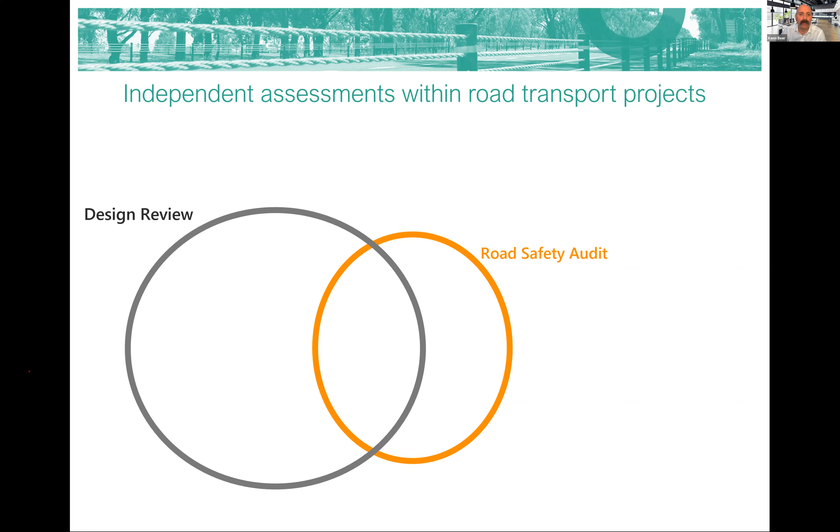You are told very, very clearly as a road safety auditor, you're not doing a standards review. It is beyond that, just looking at anything that could result in death or serious injury for road users, be that meeting standards or not. But there are overlaps you often find in those. So there's a good bit of overlap between those. There's certainly lots in the design review that you never look at or pick up in a road safety audit as well.

A safe system assessment overlaps in a different way. There is a lot of similarity between a road safety audit and a safe system assessment, but they have differences. Certainly there's differences in the way you present a safe system assessment, some of the outputs you'll get, and ideas and thinking. There is, though, certainly quite a bit of overlap there.

Then we have this other thing, generally called safety in design. Sometimes it's called different things in different areas, but it's really looking at: can this infrastructure be built safely? Can it be maintained safely? Can it be decommissioned safely? And can you operate it safely? Again, there's bits of each of these in safety, and safety in design looks at a whole raft of things that are not covered in any of these.

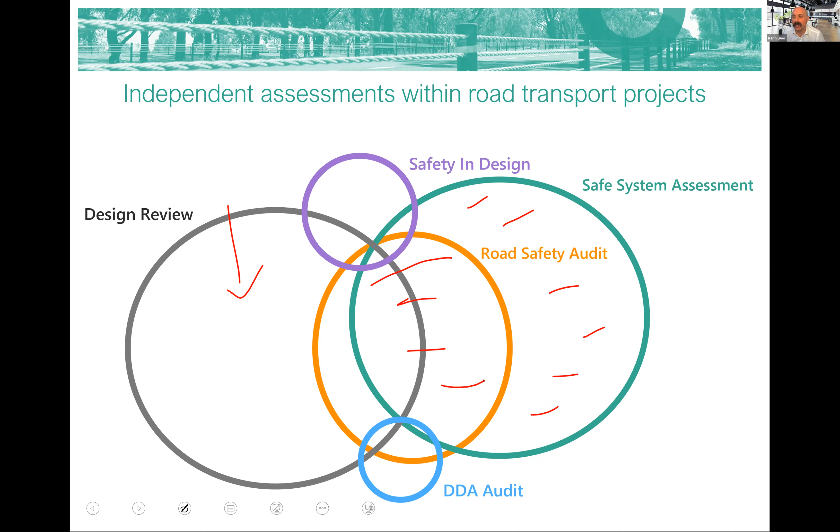Then there's this other one, generally called DDA audits. It stands for the Disability Discrimination Act, which is an act in different areas, and it's called different things in different areas, but the general principle is to ensure that all road users of all abilities are able to use the facility. It also covers buildings, and anything publicly accessed has to have that sort of compliance so that people in wheelchairs, vision impaired people, can use the facilities. And you see there's a bit of overlap in some of these, but there's a lot done outside that. So that's just a general overview to contextualize things for you.

Now, Max, tell me, are you seeing an intersection crash on your screen? I'm just seeing something on my screen that's different. That is, that's up there. Good, okay, we're ticking along beautifully there.

So let's start with intersections and mid-blocks. Let's start with intersections. We know intersections are a point with lots of conflict points, just points that you can crash with another vehicle at. We also often see a spike in run-off road incidents at intersections for a number of factors. First of all, you've got all those conflict points, so there's a lot of people trying to avoid crashes. There's secondary crashes too, so there might be clipping another vehicle and leaving the road.

And there's also quite a number of fixed hazards dotted around intersections. It seems these are spots on our network where we like to put fixed hazards - power poles, signal pedestals, other fixed hazards - they congregate around intersections for some obvious reasons.

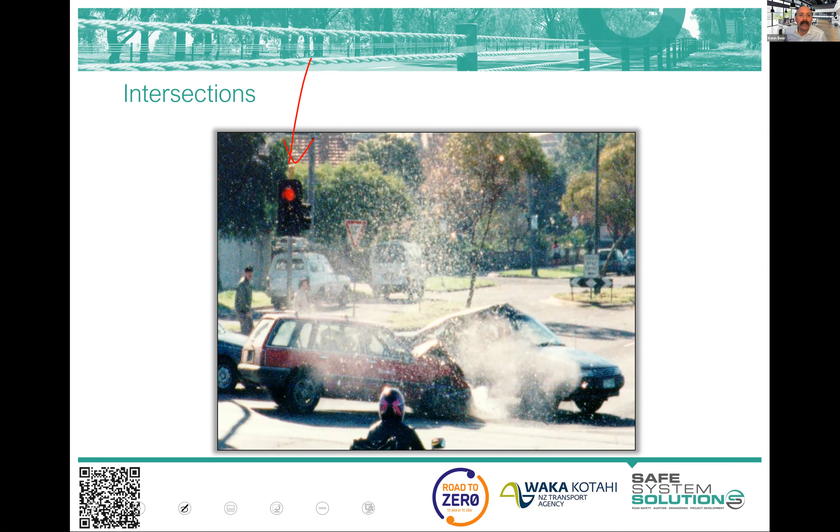So I thought I'd start with this slide from Monash University Accident Research Centre, from a four-part series investigating how to get intersections to align better with safe system principles. A whole lot of stuff came out of that.

There's this interesting set of principles for intersection design to get decent alignment with safe system principles. At the top, they're starting with fewer vehicles and fewer intersections - a slightly different take on things. But remember we were talking about exposure, likelihood, and severity - fewer vehicles and fewer intersections are addressing the exposure to crashes, as we think about it from a safe system assessment perspective.

The fewer conflict points per intersection - this is actually thought of as a likelihood factor in a safe system assessment. Traditionally, depending on who's doing your road safety study, a lot of people would talk about that as exposure. But later down the track, in order to never double count risk, that's been drawn out as a likelihood factor. Unless you've eliminated the conflict points, you still just put it in as a likelihood factor.

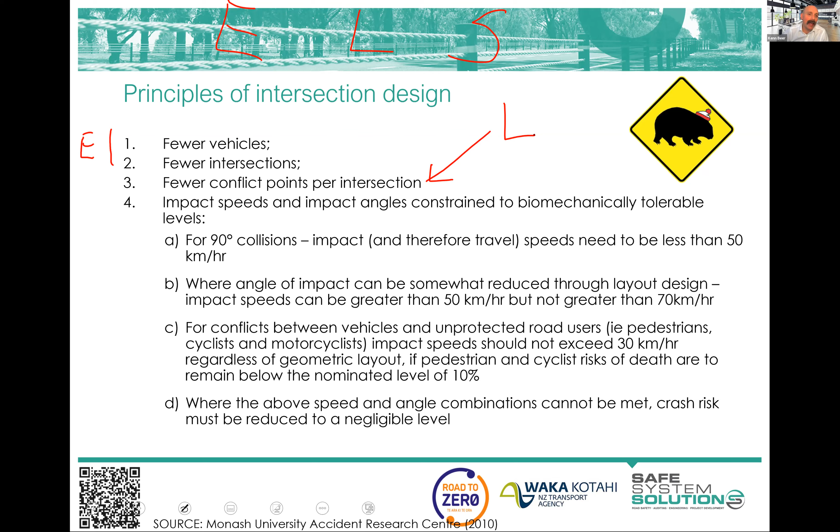And then we've got a whole lot of things here about speeds and angles within biomechanically tolerable levels. So these are back to those charts that we used. We're talking about generally 90-degree crashes, right angle crashes, less than 50 kilometers an hour. We should be aiming at that, where that can occur.

When you can get a bit more angle on that - go back to your year 11 vectors - we're getting a bit of angle, dissipating energy, bouncing off essentially. We can tolerate more speed because more of that energy is getting dissipated into the environment. Also, if it's a bit more head-on, we start to engage those wonderful safety features of the vehicle - the crumple zone, the airbag, the seat belts. And so you get some better outcomes there.

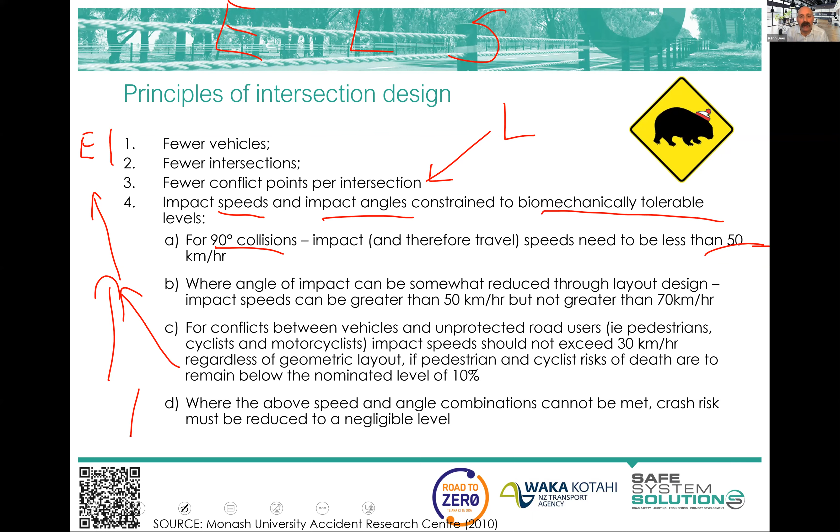There's, as I mentioned last module, a fair bit of work being done continuing to look at these curves, but for the moment we're sticking with that. Of course, vulnerable road users - we're talking about 30 kilometres per hour or below, and in a lot of instances we want quite a bit below that. Where you can't meet these above speeds or angle combinations, risk must be reduced to a negligible level. That's a generic statement, but let's explore that a little further.

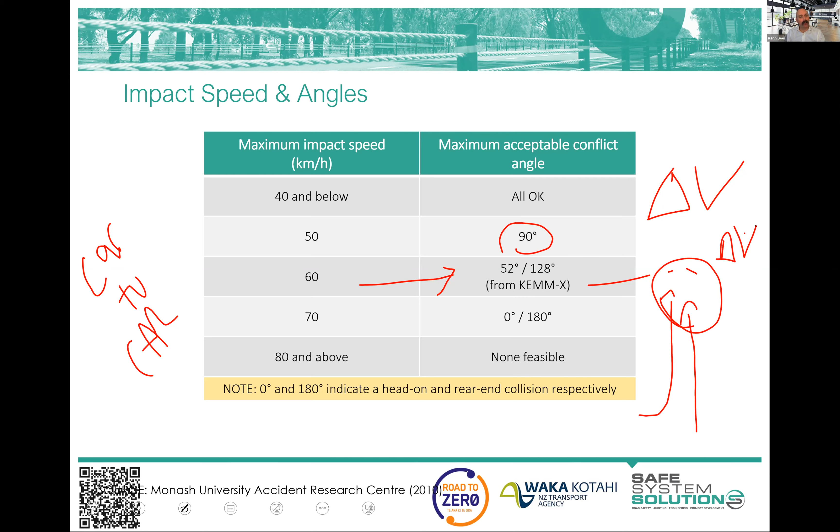The 70 kilometers an hour is the sort of head-on rear end, and 80 kilometers an hour - we can't really see it as feasible for an operating intersection at grade, unless we accelerate vehicles, because we're really talking here about delta V, the change in velocity. If you were able to accelerate a vehicle up and have it merge in, the delta V can be quite low - the change in speed can be quite low. So we can have very high speed crashes at intersections that will not result in death or serious injury, at least from the first crash.

The secondary crash impacts - we'd need to be very careful about how that's all going to happen.

So for new or existing intersections, you can roughly work out your angles and speeds, and start to calibrate that back to what we think is generally tolerable. You're not actually going to need to go to this sort of precision of detail - you can just generally go, oh yeah, that's about a right angle. So we're thinking about 50 kilometers would be good to get speeds down within that sort of level.

Just change the color, and then you might go, well actually, okay, when they get up to the other side, we've got a better angle there. Maybe that's more tolerable around the 60 kilometers an hour for vehicle to vehicle, passenger vehicle to passenger vehicle crashes.

So you can see now that we're well beyond what you'd sort of just look in there and look for, sight distance and warning signs and surface of the road and line marking and things like that. Now we're actually into a bit of biomechanics, kinetic energy analysis.

And for me, over my career, it's been a shift. Certainly early in my career doing working in the regions, doing the crash investigations, the development of road safety programs, the crash reduction studies, those sorts of things, lots of road safety audits and all of that.

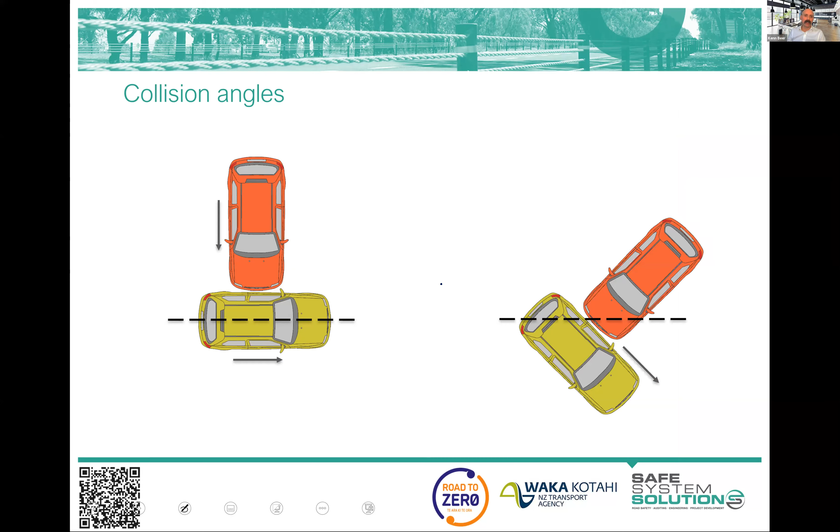There was a study done by the Centre for Automotive Safety Research looking at secondary crashes at intersections, trying to understand where they go. A neat output of their study was, vehicle there, vehicle there. They took a couple of thousand crashes with secondary impacts and reorientated them onto this graph.

And they showed that secondary crashes occur out there. Do we need a big expensive study to tell us that? Probably not.

But it's there anyway. There are some other ones out here, interesting ones which sort of clip off, hit power poles, and go into the roadsides.

But I do think when we look at an intersection, often we are drawn to just focus on that vehicle-to-vehicle crash, or vehicle-to-pedestrian, or vehicle-to-cyclist crash, and we sort of lose sight of the secondary crash impact and the poles and things all around the intersection.

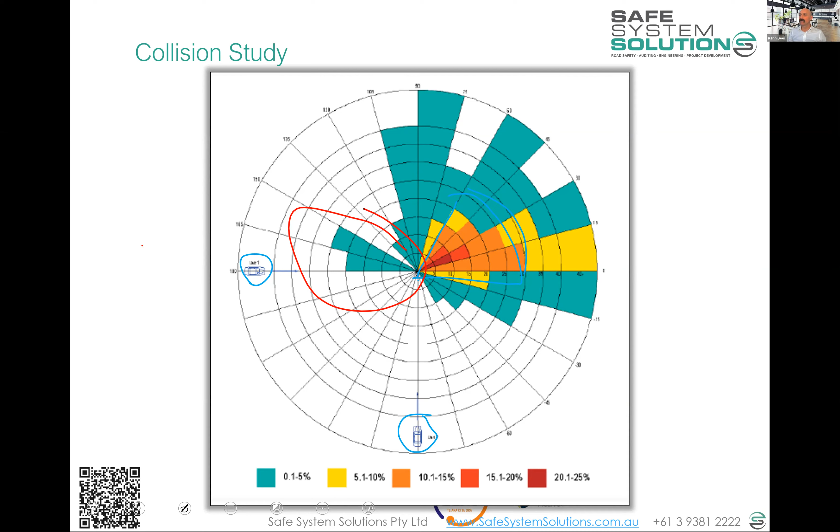So remember those energies, very important, speeds, angles, and thinking about other road users as well.

I'm going to give you an exercise now. I said there'd be one nice and early on. Now, Max, before I start giving this intersection exercise, are there any questions? Does anything need to be covered? So far, so good. Thank you, Ken. You can hop into the exercise.

Okay, here we go. Here is an intersection. The intersection. There is a major arterial road going through this, the sort of growth area of a city.

The speed limit on the arterial is 70 kilometers per hour, the highway, 70 kilometers per hour. The side road here is 50 kilometers per hour, default speed limit. What else can I tell you about it?

21,000 is the traffic volume, the AADT, and it's got about 10%, I think it's 11% commercial vehicles, large vehicles, trucks. This is a bus stop here.

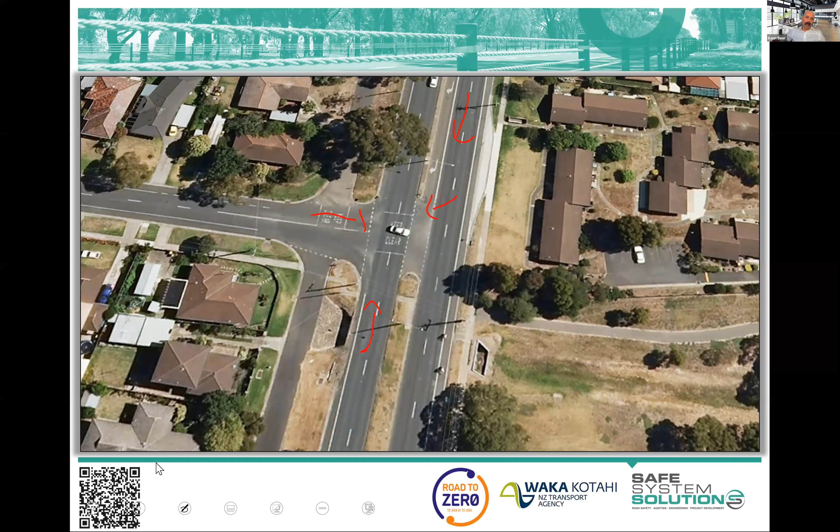So you're going to have a little ponder about it, and you're going to be typing your ideas into the chat. But wait, there's more. Any idea you come up with, I want you to tell us by just putting a letter after the idea. Are you influencing exposure, likelihood, or severity by what you are planning to do? So, you might say, I don't know, I'll think of an example that I'm not going to give away too much.

Maybe something we probably wouldn't do: build massive fences to stop pedestrians entering the area, block everybody off. You would alter the exposure to crashes because pedestrians could not cross, so there were no conflicts with pedestrians. Of course, there's a little bit of ridiculousness to that for many reasons, and they will find their way to cross if you do that kind of stuff, but there you go.

So you just put an E after that. You can come up with multiple ideas, multiple things, and we're going to give you a good 3 or 4 minutes here to do it. You might want to have a stretch as well and fill up your water.

We're only half an hour in, but Max, are you all right with that? Yeah, it sounds good, I just wanted to check in with my cost estimating tool, best practice. How much is a pedestrian overpass going for this specific environment? We're going to go $2.2 million to get that in.

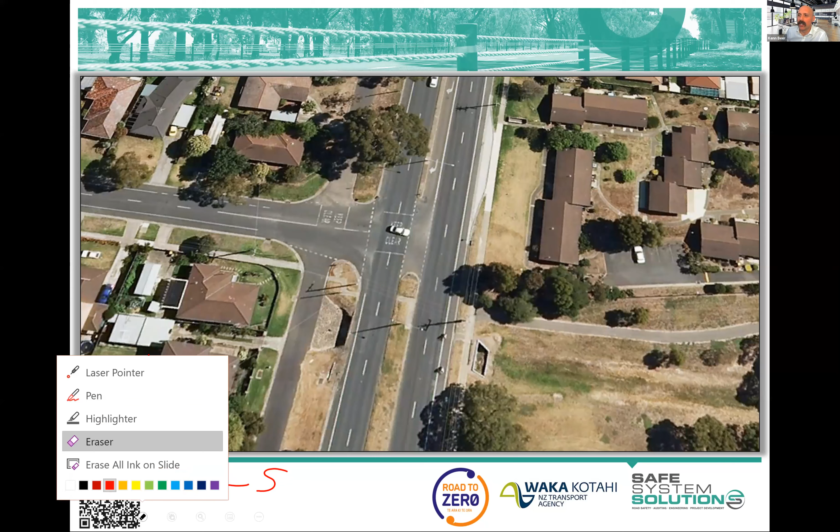So I'm going to jump through and pick a few things out that have come in which are really interesting. The first thing I noticed is there's a lot of people that want to put traffic signals at this intersection, and I dare say that's some people with a very good understanding of how road networks operate. There was a great question about the volume of traffic on the side road, trying to calibrate what is the best control to put here with this unbalanced flow, and people looking at signalization. Most people have correctly identified that signalizing this intersection would influence the likelihood of crashes, and it would reduce the likelihood of crashes.

It's not going to do anything for the severity of crashes or the exposure to crashes, at least the way we think about a safe system assessment. Yes, there might be some crashes where people have seen the orange light, gotten stuck in the dilemma zone, braked late, slowed down and crashed in the intersection at lower severity. But what we're focusing on is the higher end severity incidents that will still occur. In fact, with high speed red light running and nothing to break up the speed, we see very severe crashes. It's not really influencing severity, if anything it might bump it up a little, but generally we call it the same severity of crashes.

The exposure is the same because that's the number of vehicles, pedestrians, cyclists, and motorcyclists going through this intersection. Now if you're thinking it's going to change travel patterns, that if we signalize this more people will come out this way, okay, now you're correctly talking about exposure factors, volumes of vehicles. But in a safe system assessment, I caution you on doing that unless you've got traffic modeling to back it up. It can be tempting to say pedestrians are going to go off the chart or all the vehicles will come through here, so I'll bump up the exposure. We tend to leave it as like-for-like, before and after build, unless we get advice from modeling or some independent source on the latent demand for pedestrian crossings. We don't try to make that judgment in a safe system assessment.

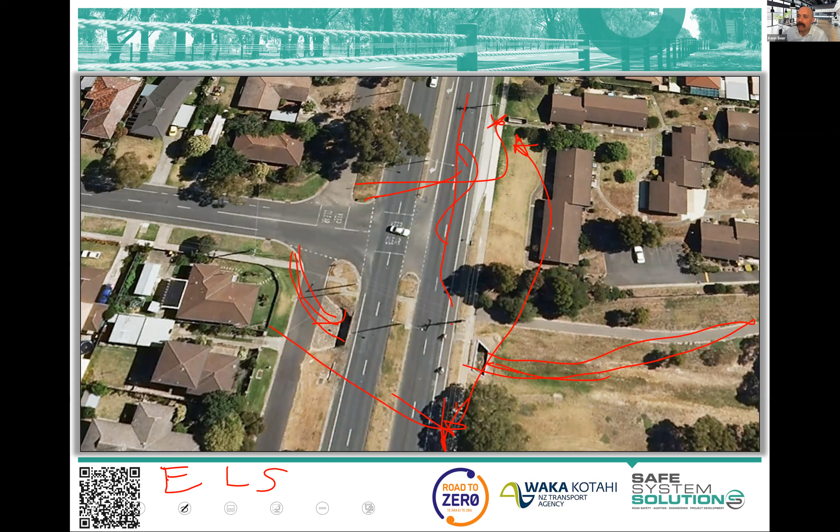There's a few other things that I just wanted to touch on. So we had some people wanting raised platforms, raised crossings. Some people didn't define whether they wanted it there or here or the whole intersection raised, but they're identifying that it will reduce the severity of crashes mainly, but potentially the likelihood as well, depending.

Physical separation between cyclists and vehicles. So there's a really good one. Now, it depends how that's done. That could actually be either likelihood or exposure. It's unlikely to influence severity of crashes, due to the fact that if somehow the crash still occurs, it's really about the speed that it all happens, not whether there was physical separation there to try to lessen the chance it happened, or you can say they're not exposed to it anymore.

But you're always a little bit cautious about allocating that into the exposure bucket, especially if we have, I don't know, some wonderful, maybe take the service road or half the service road for this nice separated facility. It's still going to have to cross this, isn't it? So we've still got conflict there with vehicles and cyclists.

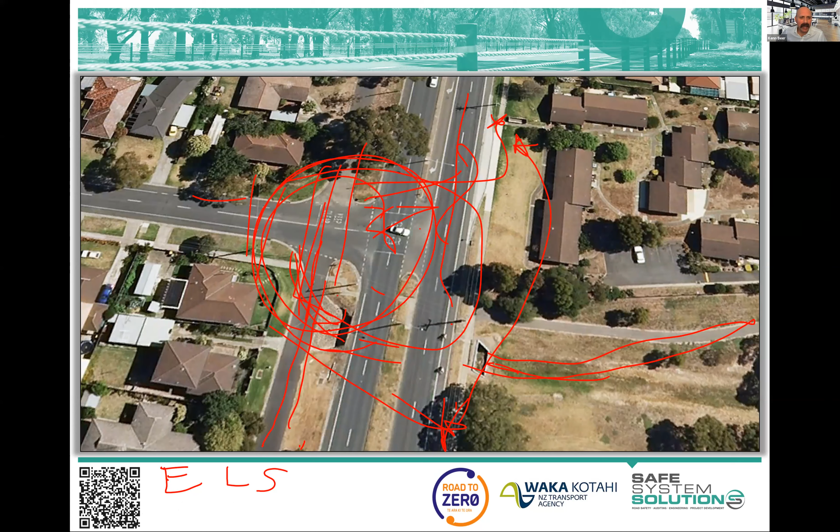Wow, amazing. Really great stuff there. I can't go through everything else. I've had a good look through. We didn't see anybody sort of, did I see it?

Ask about a seagull intersection. So that's where you'd have an acceleration lane in the median, and it kind of looks like a seagull. And it's a fun one to ponder under a safe system assessment, because you actually get this acceleration. You see your delta Vs down, and you get a reduced kinetic energy, but your likelihood goes up a bit, associated with merging from the right, which is a nasty sort of maneuver to try to do.

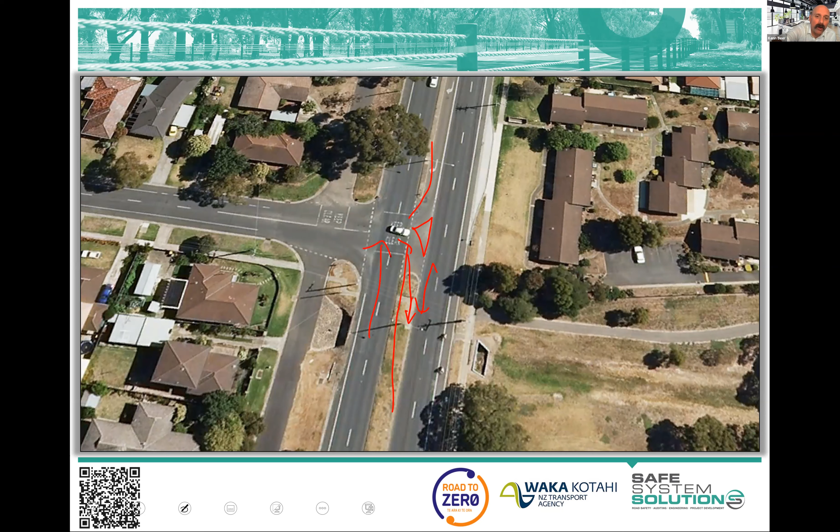And if you have an articulated vehicle like a truck, there's no ability to do that head check. We know old people really struggle with this. So you've got increased likelihood. You're still exposed to the speed and that right angle crash. It's an interesting one. But I just point you at the New Zealand work that was done on seagull intersections.

And there's a seagull intersection risk tool available on the Waka Kotahi website. I use it often. It's lovely. I think that was Shane Turner who came up with that one, but it's freely available to download with a user manual and all. Wonderful stuff.

And Lachlan's also pointing out there, awful for peds in this environment, absolutely. And so you would be thinking about having to add controls to it if you were going down that track. I'm not a fan of seagulls, and I don't think it would come out that well in this location due to volumes and different things. But I just thought I'd mention that exciting tool that wonderful New Zealanders have produced.

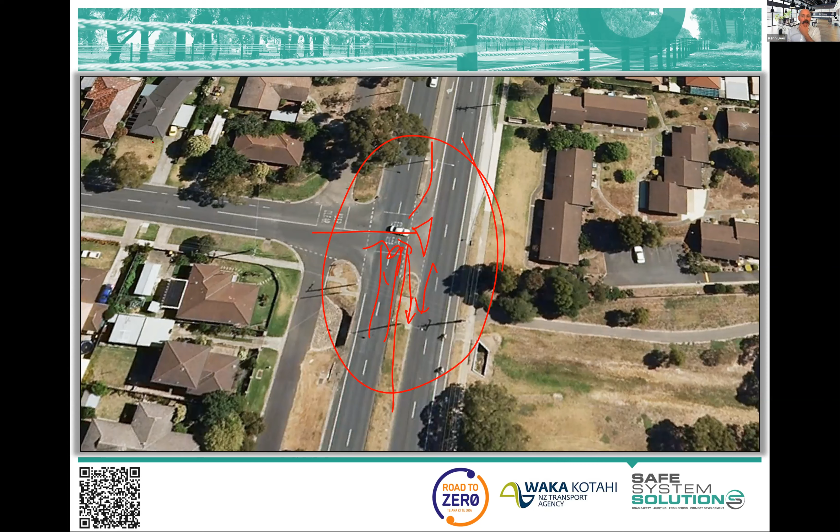All right, I'm going to talk about a few of those things that you've come up with. And Max will tick away at a few things behind the scenes here. So we talked about signalizing, and I mentioned that's going to influence the likelihood. It will reduce the likelihood of crashes. We know that. And we know it's going to be somewhere in that 15% to 45% range, probably, depending on exactly which study you look at.

Lots of factors influencing that. But it's going to address that likelihood. And so really we're not achieving our safe system aspirations if we just do that. And we know that there's that high kinetic energy, potential death and serious injury just sitting there if somebody makes the mistake to run through the red light.

And the reality is, and we wish it didn't happen, there are just a lot of people who run red lights, either because they're not concentrating, they've worked a double shift, they're half asleep, a little bit intoxicated, maybe they're intentionally running it. The mechanisms for why they run it are huge. The end result is high energy crashes and death and serious injury.

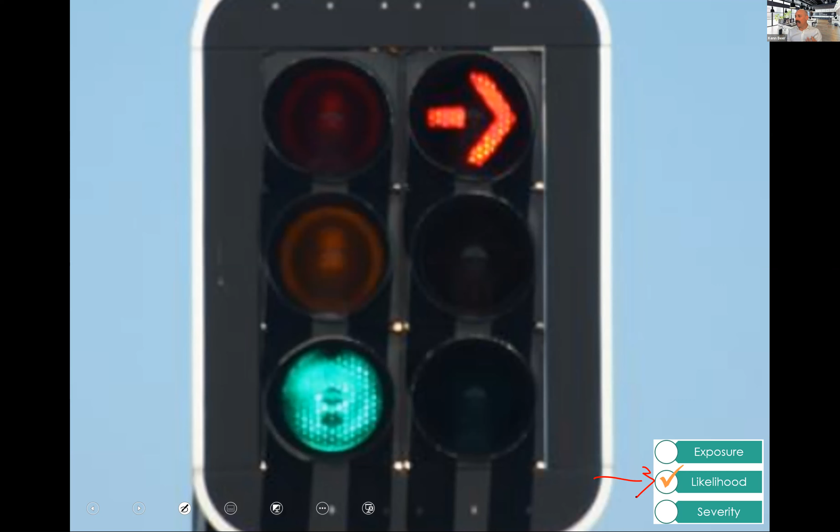In fact, I just mapped, I could have mapped anywhere. I could have mapped the outskirts of Auckland, Hamilton, Wellington, where you've got arterial roads and speeds are up. And this one was actually the outskirts of Melbourne, growth areas and the like, where you've got speeds up and you've got signalized intersections.

Each of these hotspots is death and serious injury. These are actual people killed and seriously injured. These are all large signalized intersections. So we sometimes think of signalizing as your ultimate form of control, don't we? Until you can obviously afford to do flyovers and grade separations and the like. But the thing is that it's probably not, in a death and serious injury sense.

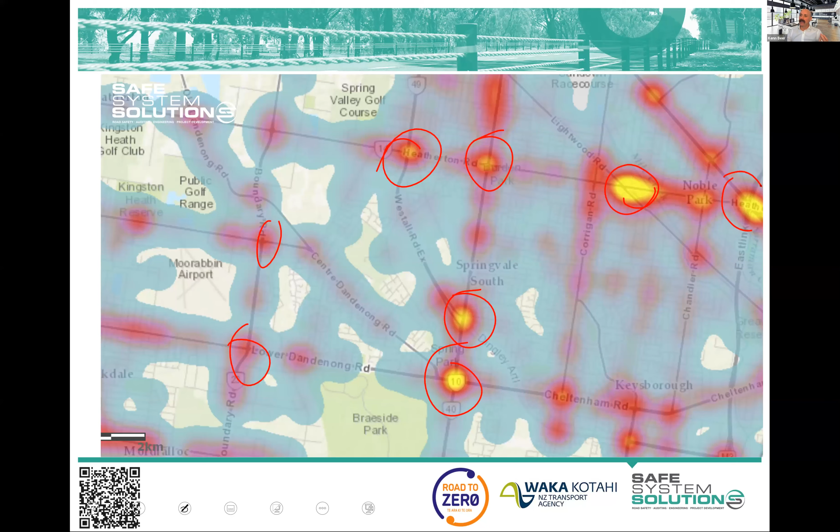Professor Jeremy Woolley made this provocative statement during a national inquiry: traffic signals are the biggest failure of traffic engineers. Pretty provocative statement, I chuckled. He means it squarely from the death and serious injury perspective - we've provided really good red lights, mast arms, LEDs, and people have got to follow the road rules, stop at red lights. Roundabouts, on the other hand, are really wonderful from that severity perspective.

This is road safety engineering 101, but it's always a good reminder, isn't it? Roundabouts slow people down, they're more alert, the angles of crashes are better, there's less conflict points. So many wins with the roundabout.

Now I'm talking about passenger vehicles, and I'm going to spend a good chunk of time on pedestrians and cyclists at roundabouts in the next module. But passenger vehicle to passenger vehicle in these sorts of environments we're seeing here, it's far superior in terms of death and serious injury outcomes due to those factors.

But they have to be big - 7 million, wouldn't surprise me costing that, in the environment you were looking it could cost more. The size, the land take - you've got to get the big vehicle going around it. This is obviously not the same road environment. You would have bought a lot of houses if you had done that. Big swept path of vehicles, and they're very expensive.

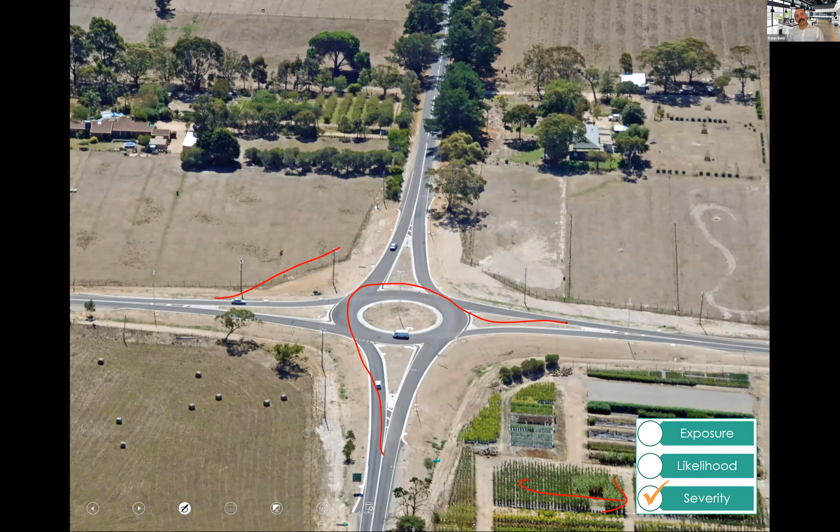One of the big reasons is that anybody approaching this does not believe they're going to have priority. That mindset of priority - and again, it's so subconscious - means that speeds are high, concentration is down, being alert to the road environment is down. But as soon as you break it up with this sort of stuff, people come back to reality, they look around, they slow down, they're at least aware and check.

There's some amazing things - this is sort of the UK equivalent of the American four-way stop, where you don't give anybody priority, everybody slows down, and then there's a bit of who goes first, but hey, it's all happening at low speed. That's wonderful.

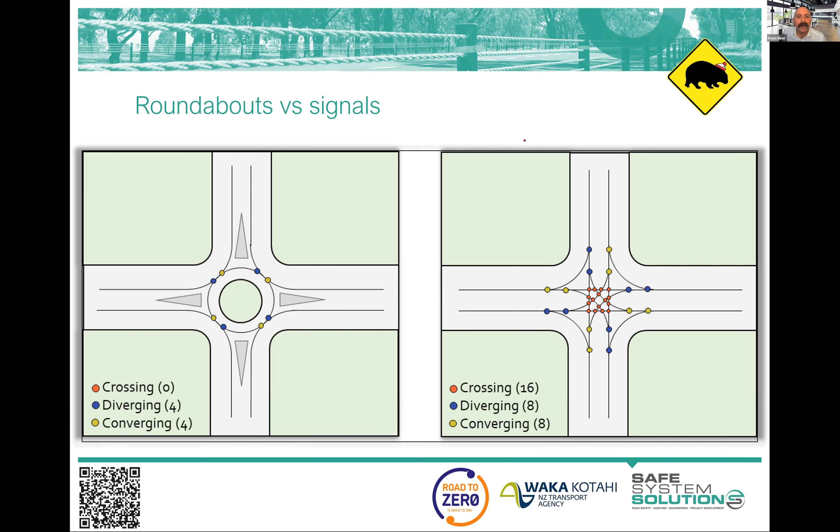Less conflict points, angle of crash is better. The angle of crash is better, right?

And this is the one I talked about - people are driving along in all sorts of states of consciousness. They're half asleep, they've had a fight with their partner, or they've been at their brother's wedding, didn't sleep, partied all the next day, got in the car and drove home. We do not condone this - we are doing lots of things to try to discourage it. But I think from an infrastructure management perspective, we need to start getting our heads around the fact that we do not have alert and compliant drivers all the time.

So what can we do to stimulate interaction with the road environment at critical conflict points, like an intersection?

The big roundabout just wakes them up, back to reality. A big roundabout, infrastructure in the middle of the road, or some way the road tells you to wake up a bit - you have to navigate something, do something. You're back, looking around for a bit, then maybe they go back to sleep a bit. We don't want them driving in that state, but we're trying to address these areas of spiked risk.

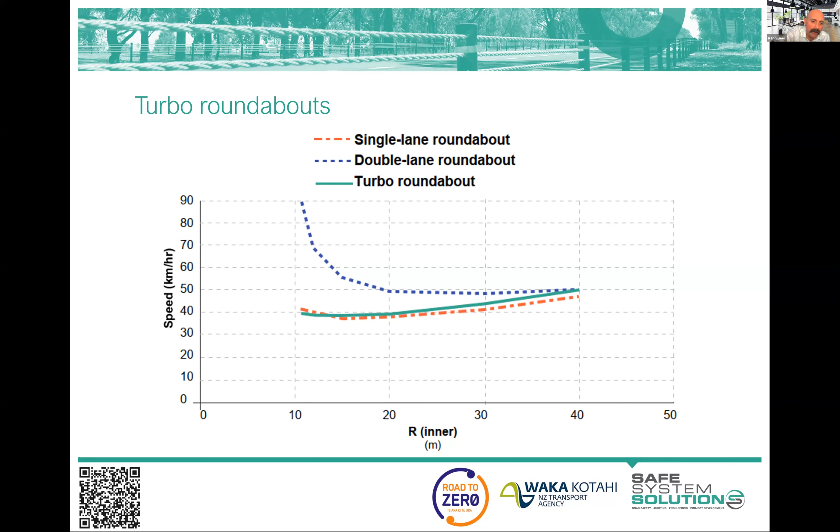Just on roundabouts for a bit of fun - not all roundabouts operate the same, as many of you know. We've got single lane, double lane, triple lane roundabouts sometimes, and turbo roundabouts. Turbo roundabouts operate pretty much the same as a single lane roundabout, but they're a double lane roundabout. I'll show you what they are for those who don't know.

You've got a raised separator on the approach, and a raised separator through your roundabout. So if you want to do a right turn, you get into that right lane, go in, go around, and out you go. You want to do a left turn, you obviously get in the left lane. There's another turbo, and I love this.

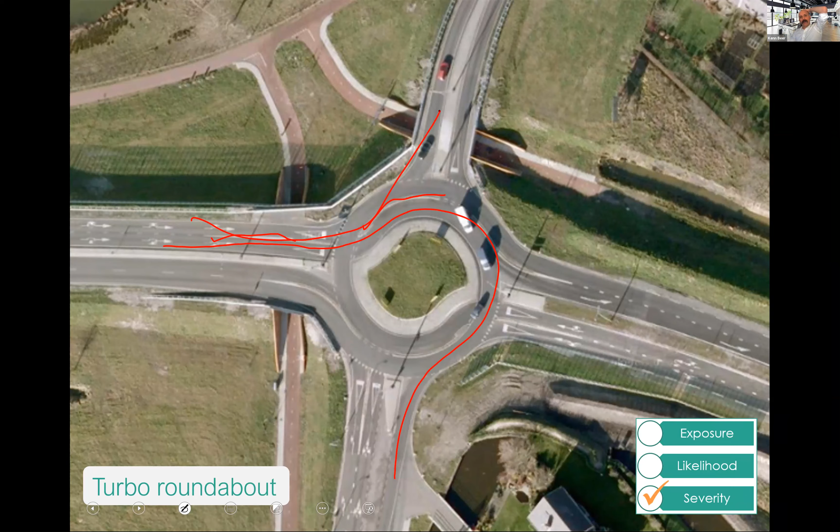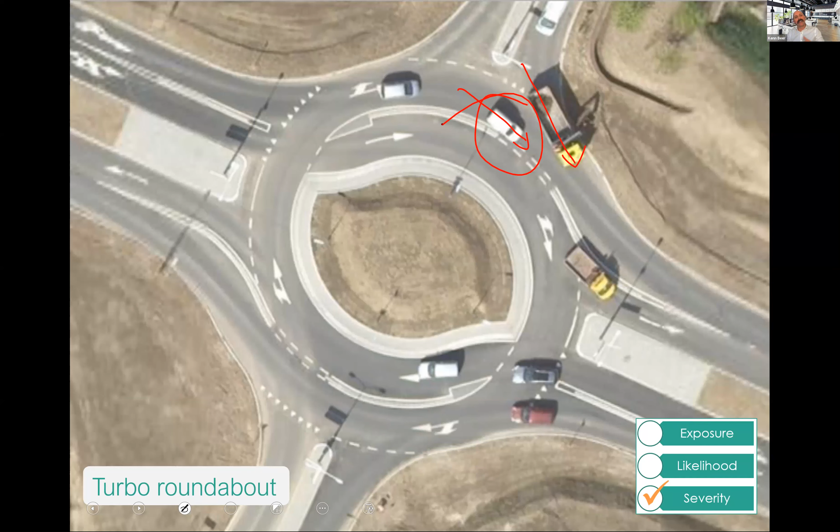I love this aerial image just because we've got a truck that's come out, made a mistake, probably pulled out in front of the white van there. Look at the angle on that. And we know that vehicle is going slow because it's had to navigate around that curve there.

In Australia and New Zealand, with the volumes you're talking about here, we would probably have a signalized intersection. It may have got to the point where we grade separated it, but it's probably going to be a large signalized intersection at those volumes. The Dutch engineer looked at me and said, 'with speed reduction, yes.' I said, no, it'd just be 3 lanes each road, signals. He said, 'with speed, you manage speed.' I said, no, it'd be 70 or 80 kilometres an hour. He said, 'what about all the death and serious injury?' He just couldn't comprehend this.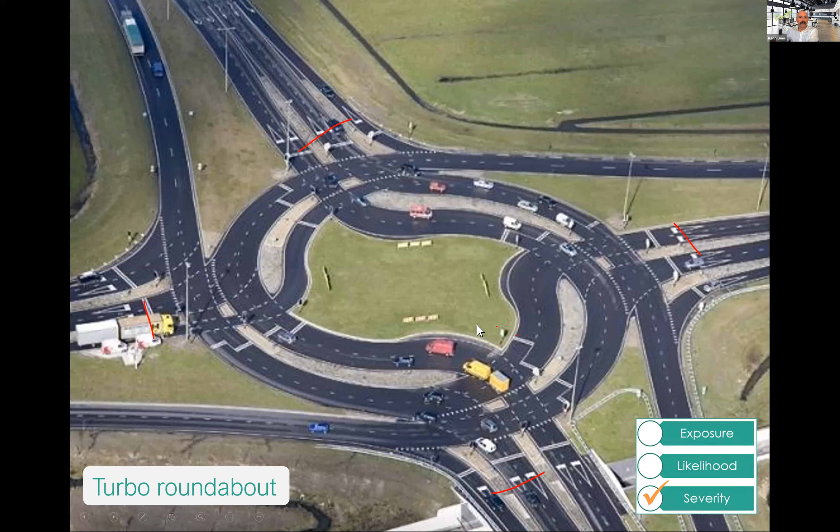Basically the program was to rip out roundabouts and replace with traffic signals. Sorry, I'll come back to this crazy design in a second - not crazy, but I want to see if I can find a memo we used. So they were expecting us to review: is the phasing right, the line marking right, are they using LEDs, that sort of stuff. That's what they were expecting us to come back with.

The Road Safety Department's analysed this project as increasing crashes as follows: project life 20 years, number of deaths attributed to this project 2.3 - I'll put some real people there - number of serious injuries attributed to this project 12.6. Statement of acceptance: the above road trauma is accepted by, and then I send it for the regional manager to sign off.

Yes, we were intentionally being provocative here, but the reality was that you kind of go, we know that is going to cause death and serious injury. It's just that somebody has decided that getting a little bit more capacity through that intersection is more important than the death and serious injury of the community. So we need to boil it down to some in-your-face type thinking.

Anyway, just one you might have found interesting there. Back to the slides. I was just about to show one that I like. Again, it's slightly for fun, but there's a lot more thinking to this, right?

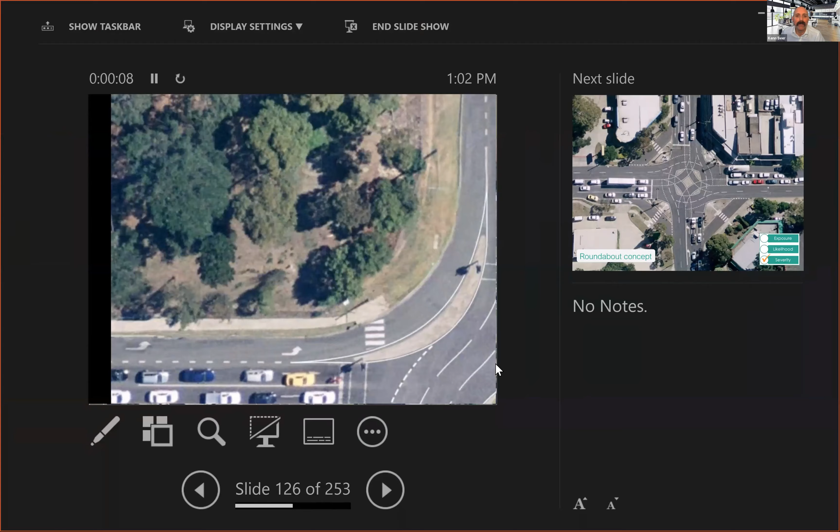Traffic signals tend to operate traffic better, because you can manage traffic, you can get more through and the like. And so that's often the reason why they're ripping those roundabouts out and replacing with traffic signals. But can we still retain some of the advantages of the roundabout, but get the capacity through it with something like this? There's the cut-through roundabout.

Now, this is an artistic impression. It hasn't been built, much to my disappointment. I genuinely think if you're at ground level, it wouldn't be as crazy looking as it is. But anyway, the idea is that a vehicle approaching this would see the infrastructure, slow down, wake up. We'd have improved angles then of different crash types in a lot of circumstances. You get lots of capacity through, and it's going to have generally pretty good safe system alignment. I like this kind of thinking from the principles perspective. There's a lot to work through in operationalizing something like this, obviously, but just the principles I like people thinking through. And there's lots of little mock-ups of this sort of stuff, trying to get some of that benefit.

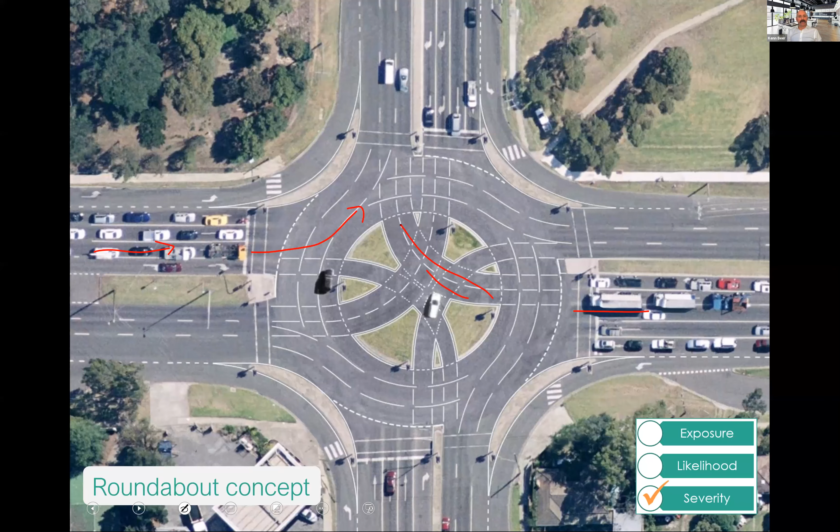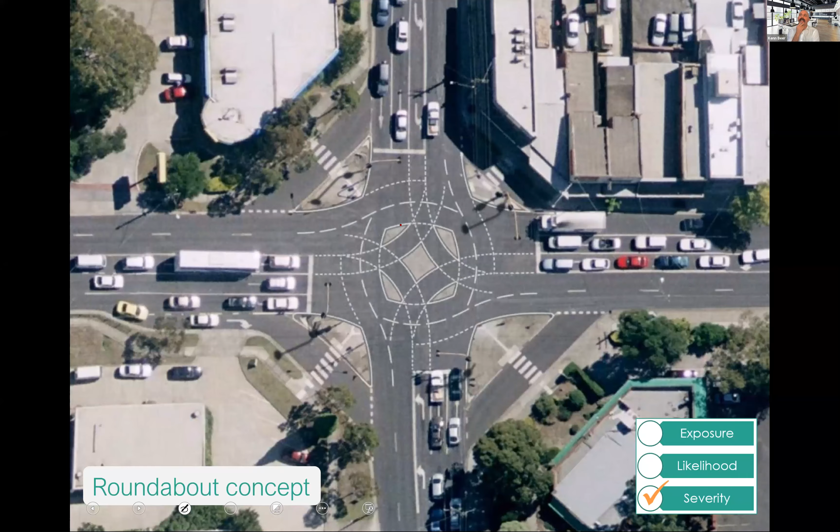Now, a few of you put in there, why don't we do some raised platforms, raised intersection, or the like. Now, certainly when I started my career, if I'd said, why don't we do vertical deflection, something raised on that arterial road with buses and trucks and 21,000 vehicles a day, I would have been told to sit in the corner and think about what I just said. It's craziness. That's the highway, that's the arterial road, you don't do that. Vertical deflections are for your local streets and the like.

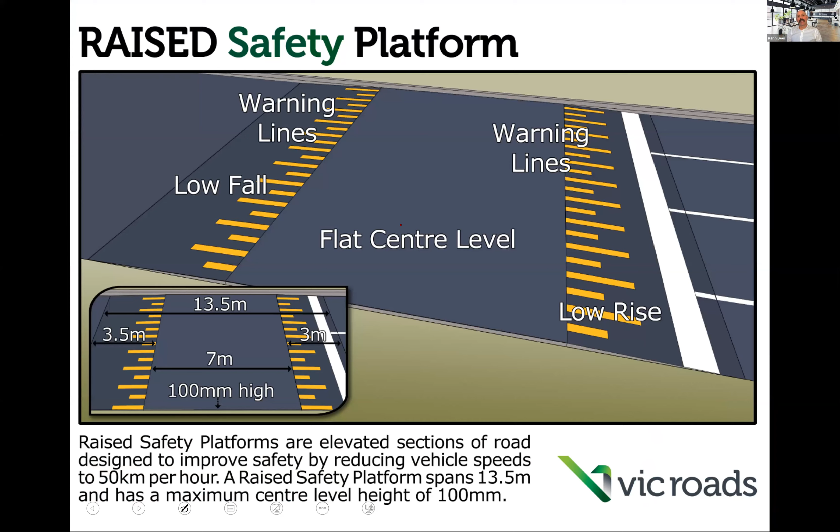But we've sort of altered and shifted that, and we're much further advanced in our thinking these days. And we can understand that it's not necessarily a local speed hump type thing we're creating. It's a platform, it can be shallower, and we can target it to whatever speed we want. And that's what the region came up with for that site that you were looking at. Now, they sort of pondered it, and their budgets, and the traffic flow, the unbalanced flow, and a few different things.

And they decided signals were appropriate, as a lot of you did. But they weren't willing to say, well, maybe if we build these signals, they'll operate differently to all those other ones that there's death and serious injury. Maybe people will take more notice of this red light. No, they're realistic. They said, we're building it, we're going to leave a residual of death and serious injury by doing this. We're going to certainly improve road safety, but is there something we could do to try to help it?

And they said, look, can we slow the bullet vehicles down a bit? These are the bullet vehicles, right? These are the target vehicles, the ones coming out, the ones coming in, right? They don't need to be slowed down because they're not doing the damage, they don't have the speed to do the damage in this scenario. We just slow the bullet vehicles down and try to slow them down to a speed. They went with 50 kilometres per hour as their aim to slow vehicles through the conflict point here, due to the right angle crash possibility and the safe system threshold speeds.

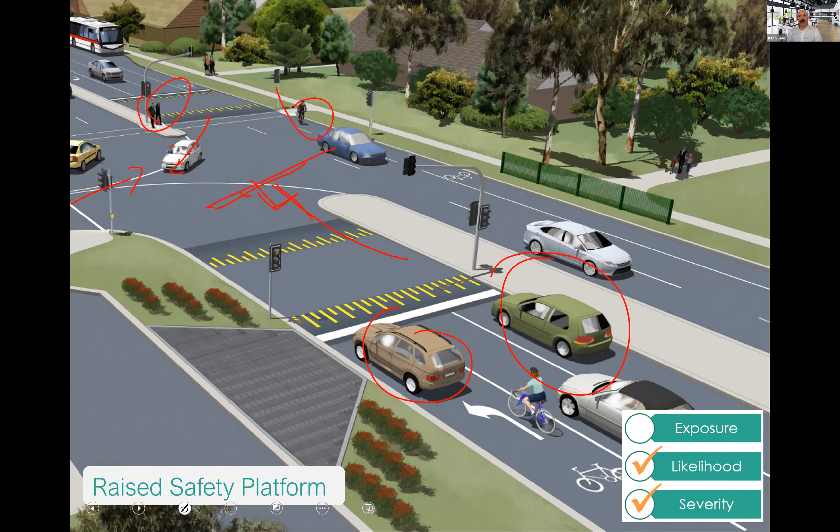Pedestrians and cyclists, you'd like it lower. There's fairly low volumes of those. So they maybe haven't got us to full alignment with safe system principles, but they're doing quite well. Anyway, they built that. There it is. You can see there, 50 kilometres per hour.

Advisory speeds, not regulatory speeds. There they are again, just slowing those vehicles through. I was out there with a colleague doing the post-opening road safety audit of this one, and just a couple of photos that really make me happy. This one is one of them: the vehicle is braking on the approach to a green light.

People sometimes get angry at that, saying it's just inefficient. But if it was a roundabout, we wouldn't have a problem with people braking before it, would we? No, for some reason we're just attuned to want to drive through at speed, switched off. I love that.

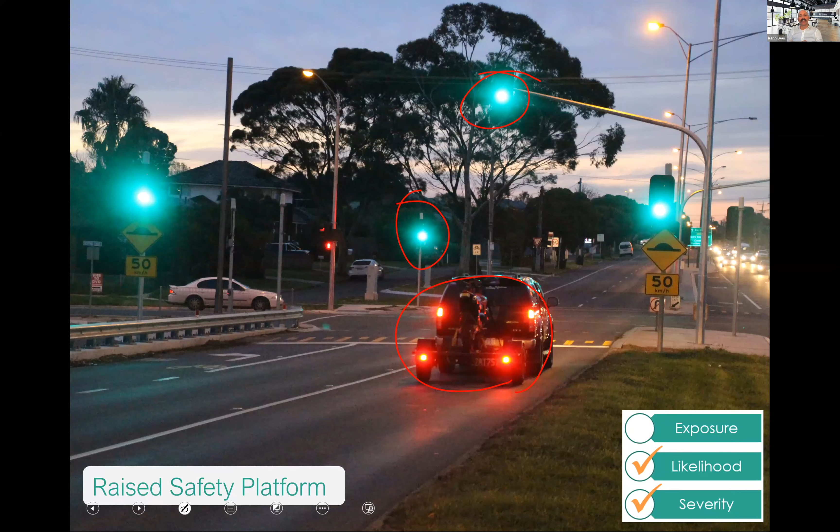I love this one as well, where we've got the shift in the dilemma zone. The dilemma zone, for those who don't use that term, is the point in time and space where the light's gone orange and you don't know whether to hit the brakes or the accelerator, go through or stop. It's officially called the dilemma zone. Google it, have a read up on it. It's great stuff.

Some of the evaluations are showing this condensing of the dilemma zone, because with the vertical deflection, the raised platform, people are just more inclined to stop. So that's some good road safety wins as well.

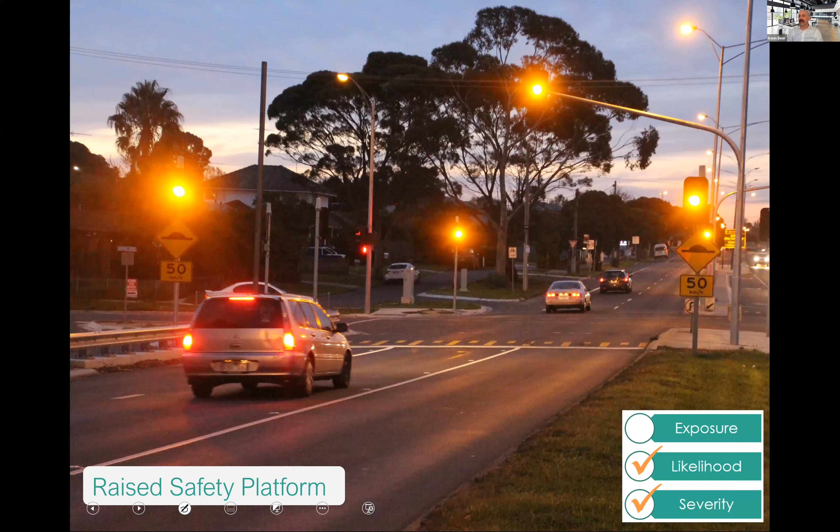I'm just loving seeing these emerging around New Zealand and around Australia, and we certainly know the Hamilton one that's out there. Gordonton - somebody will pop that into the chat - it's just on the outskirts of Hamilton. I went out there with Simon Crowther a few times in the design period to have a look at it. It's just beautiful. This is good stuff.

This is excellent stuff, and there's lots of investigation going into it. I just love that people are now thinking about trying to address some of the severity at these large signalized intersections.

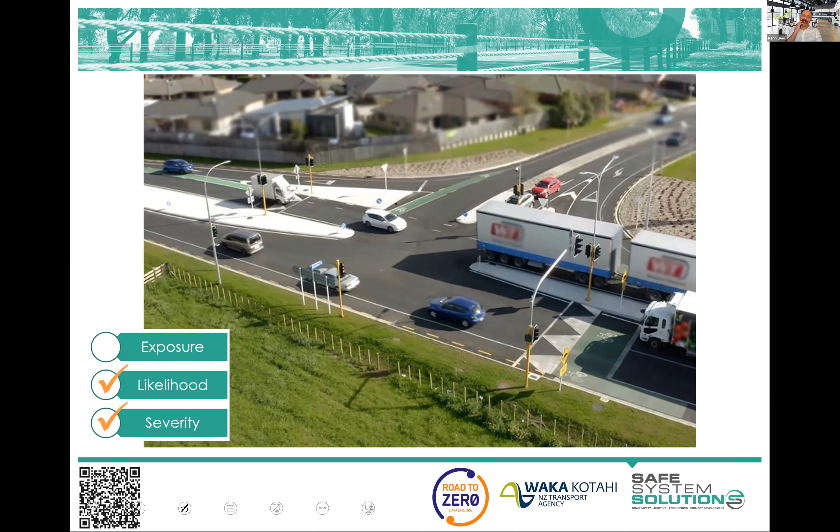Here's another example, again making me super happy. This intersection used to be a roundabout. The roundabout was being pulled out under a current congestion easing program, replaced with traffic signals. But a safe system assessment had to be undertaken, and it showed this would make things worse. As a result, the project team implemented raised platforms to at least bring speeds back down - making it pretty much as good as the roundabout for vehicles, and probably better for pedestrians with some increased control.

This road carries 53,000 vehicles a day, and this one carries about 27,000 vehicles a day - this isn't stuff for low volume roads anymore, we're talking big arterials. I've just read an evaluation, not yet published, of seven of these - three on this road with 53,000 vehicles a day, and some massive other ones: a 27% reduction in fatal serious injuries compared to just the signals, and a 60% reduction in fatal serious injuries for pedestrians with the installation of the raised platform. Massive. So I'm excited that New Zealand is going gung-ho at this - I think it's what we need to do.

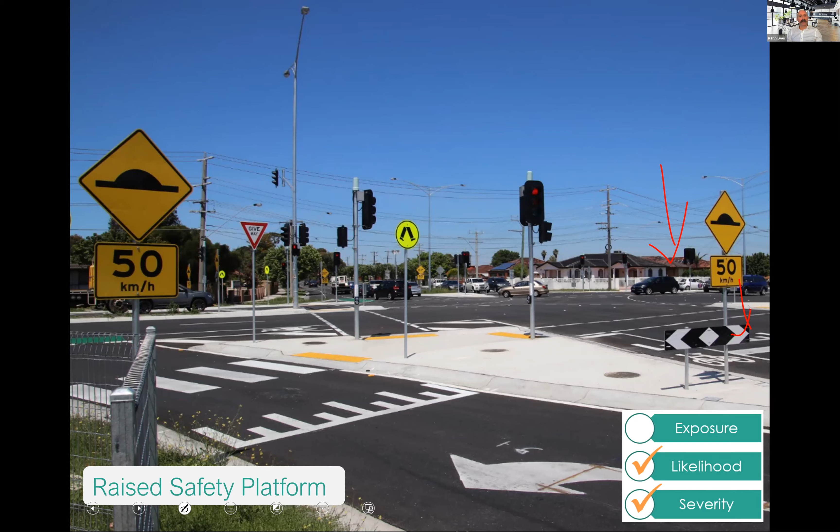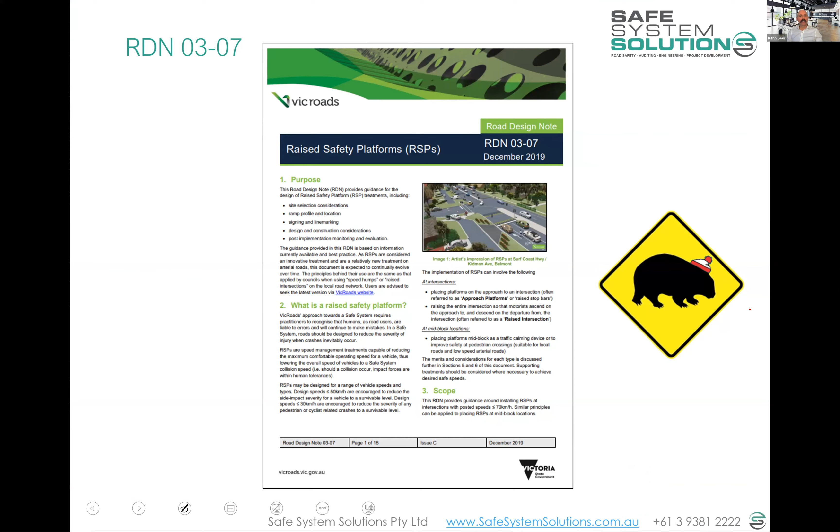There's some good guidance out there - the Victorians have got some guidance, Road Design Note 03-07, have a flick through that. That was some early guidance available. And then Hamish Mackie and crew, very wonderful New Zealanders, did the Austroads report on effectiveness and implementation of raised safety platforms. There you go, I've got the Hamilton one right on the screen, front cover. Good stuff, good stuff.

Max, anything that I need to deal with?

Lots of good comments coming through. We had a really cool example of a roundabout that was kind of like a turbo roundabout installed in Leeds - there's a link there, but I might send it to you later on, Ken, to have a flick through. I thought it was pretty cool.

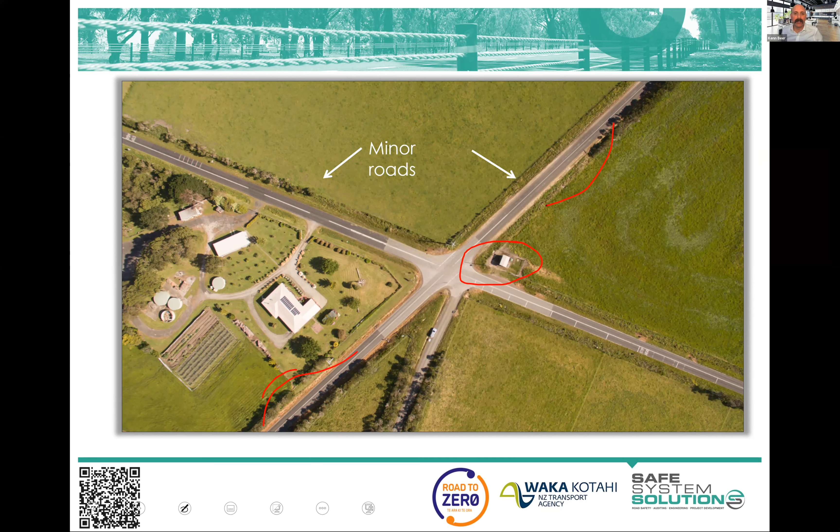So the region was saying, well, what can we do here? There it is, you can see it, and there were lots of ideas around what we'd call supporting treatments - good road safety treatments, but not going to get us that massive step change we want.

Things like a dedicated right turn, a rural intersection activated warning sign, the old RIAWS - good stuff, good road safety treatments. If you can't afford something more, definitely be putting these in.

But they really wanted to push hard on this one. There were some of the crashes that were occurring.

So they said, well, what about that idea of a smaller roundabout? Could we get some value out of that? They designed up what they refer to as a compact roundabout for this location.

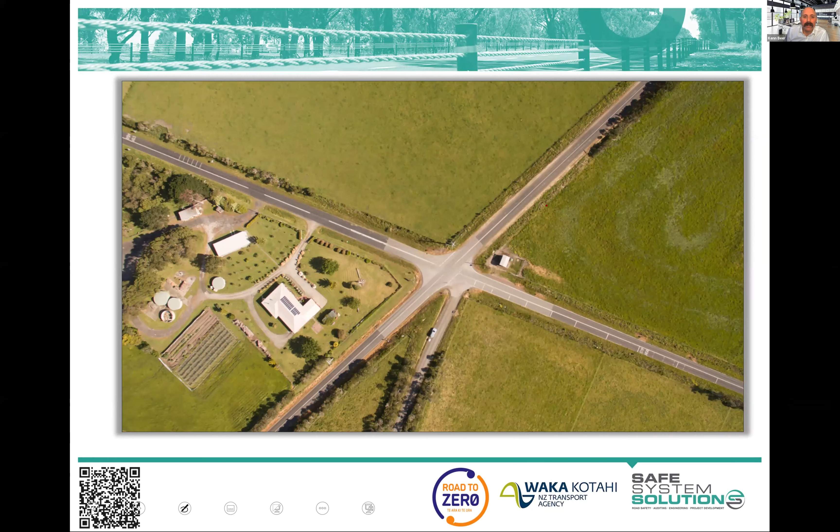They did reverse curves on the approach - that's the chicaning that slows you down. They had a very small roundabout in the middle, and then a concrete apron around it. Raised intersection here, with raised platforms on the approach to slow people down - shallow things, not very big, violent ones.

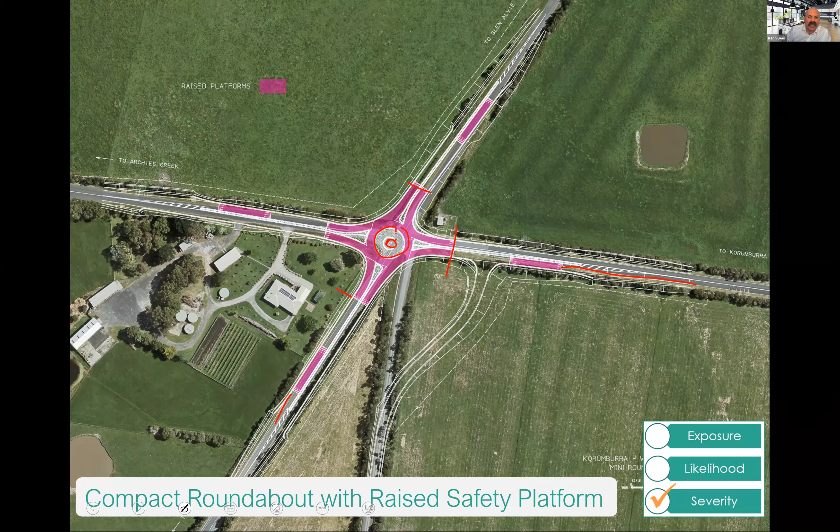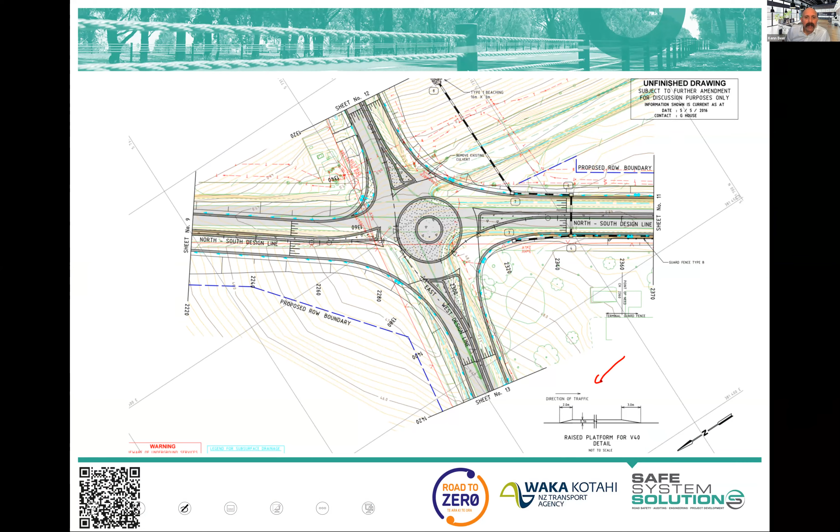Some detailed design work on it, some good analysis on ramp grades. I can send you the detailed design of this if you're interested in the very specific detail. Then they built that one.

There it is, a bit of drone footage, and you can see there the nice sort of slow-them-down effect through the intersection. I've shown a few of you this before, but it's operating really, really well.

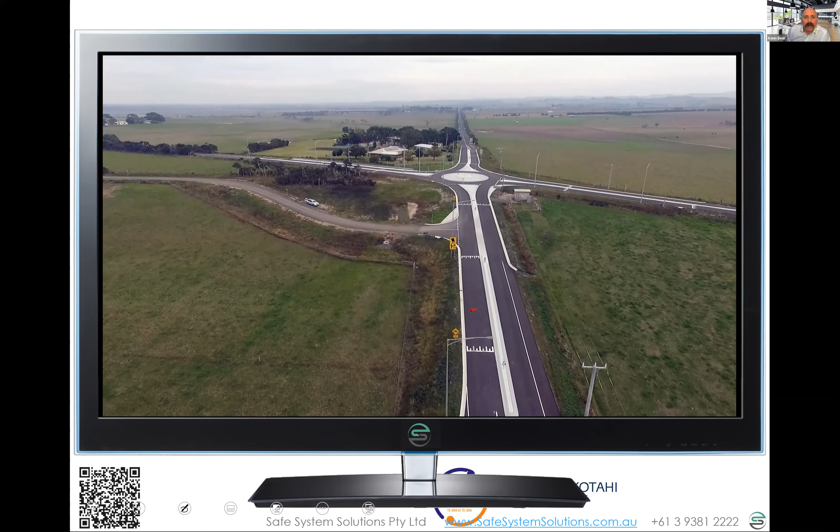See the tiny little island there, so a large vehicle can still get around here. It just sweeps over, tracks around and comes through.

We've just finished some design guidelines on compact roundabouts, which hopefully Department of Transport's going to release soon. They're doing what governments do and scratching their head over a few little intricacies.

But yeah, another exciting one. Let's try and get our safe system outcome at lower cost. Yeah, it's a good one.

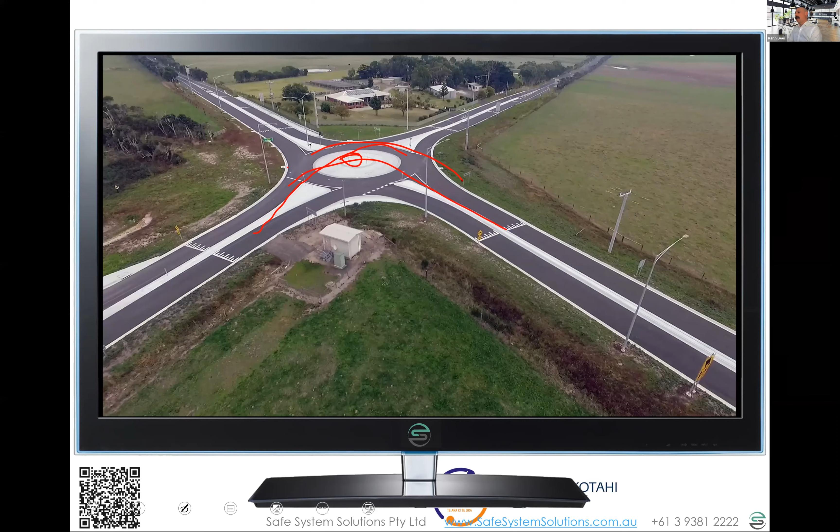Max, quiz it up. Have we got a quiz, or am I going to ask the question? Let me consult my quiz manual here. We do have a quiz, which I'll launch right now.

Thank you. Remember, you're not being marked on the quiz, it's just one to ask a question. What does it say then, Max? True or false: traffic signals are not safe system. Is it true? Is it false? Is it an unintelligible question?

A little bit of a cheeky answer there, Ken. Yeah, unintelligible meaning, basically saying, Ken, it's a stupid question. What are you even talking about? What are you trying to get out of that?

Julian asked a question there too, which I was just checking up on: is it still technically considered a compact roundabout? Is it still within the Austroads Guide to Road Design diameter range? No, it's smaller than that - it jumped out of Part 4B, so it's an extended design domain beyond that.

A lot of the debate going on at the moment is around, can we make this the default? Then you've got to prove why you'd go a bigger roundabout, which is kind of fun because if you know you're going to be delivering roundabouts for about half or less of the price, we get a lot of benefit, but there may be a little bit of interest.

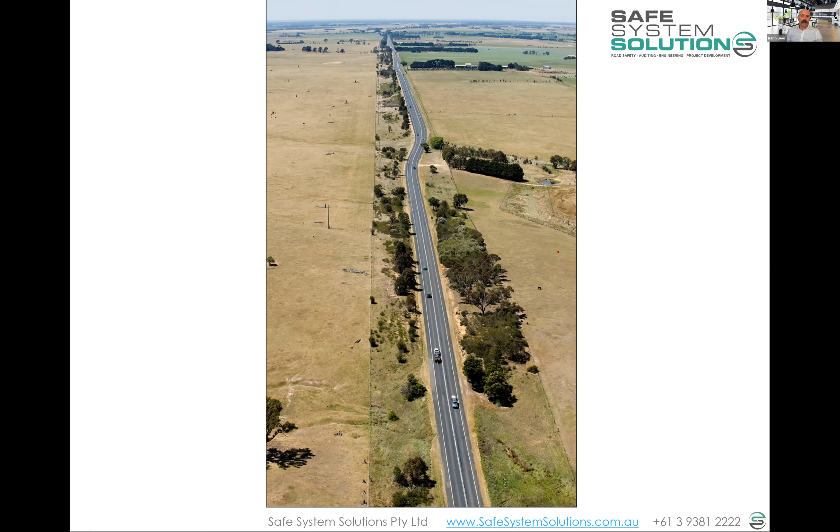And we just have a huge abundance of road network in New Zealand like that, don't we? We've got a lot of the state highways that have these sorts of characteristics and high speeds. What we're going to do to try and fix those is very challenging, and there's a lot of network.

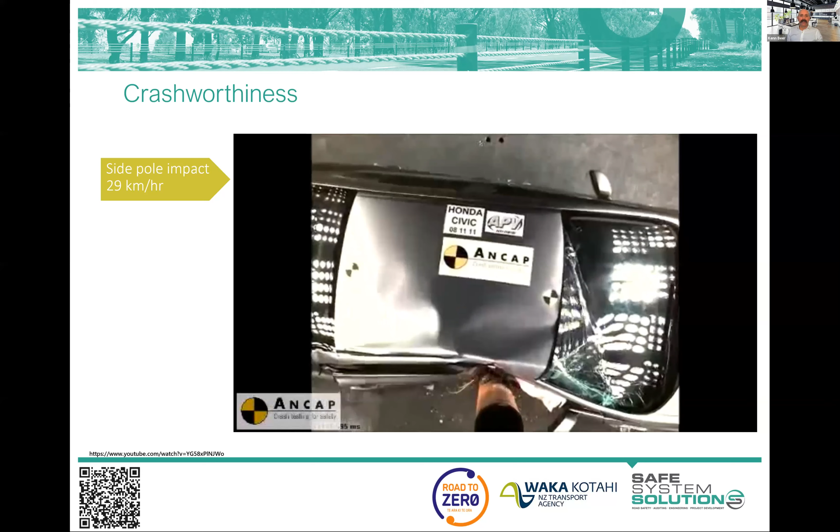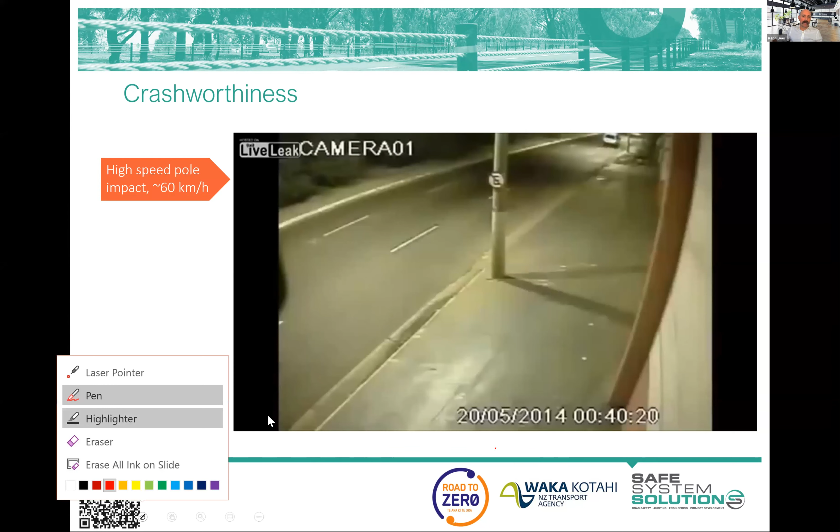I just remind you that side impact with an actual pole, a tree, power pole, or the like, happening at anything above sort of 30 to 40 kilometers per hour is pretty likely to result in death or serious injury to the occupants of the vehicle. Here's one of a predicted 60 kilometer per hour strike with a pole, just to show you the violence and the energy in something like that. It's just staggering. It's such a violent transfer of energy.

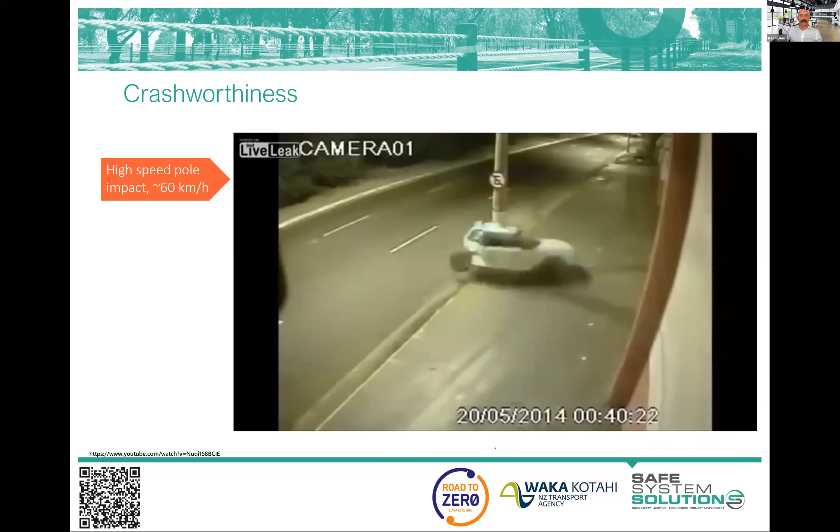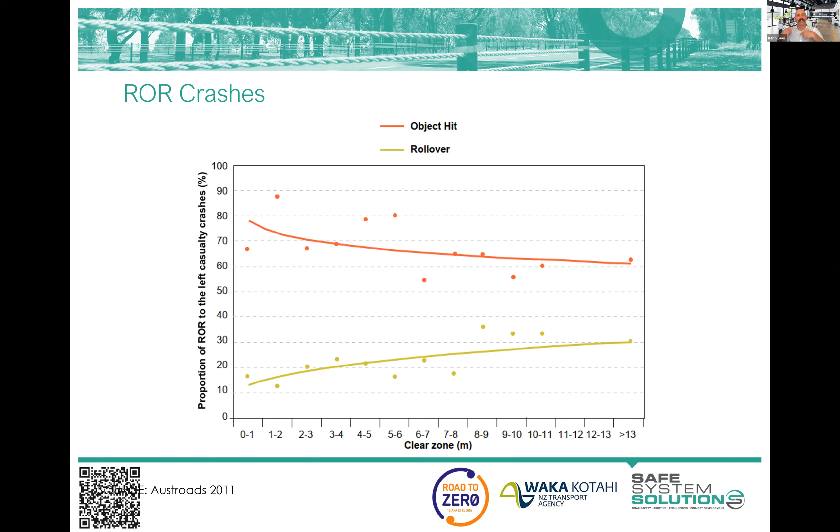Now, VKT - we'll give a prize to whoever can tell me what VKT stands for first.

And a question. Who was in first, Max? I've got Lachlan - vehicle kilometre travelled. So yep, give it to Lachlan there. Yeah, good, Lachlan, you're on the prize. Well done, on the prize board.

Yeah, vehicle kilometres travelled. So it's trying to make a measure of the relative risk, taking into account the amount of vehicles going past an area. But it's a good like-for-like comparison there.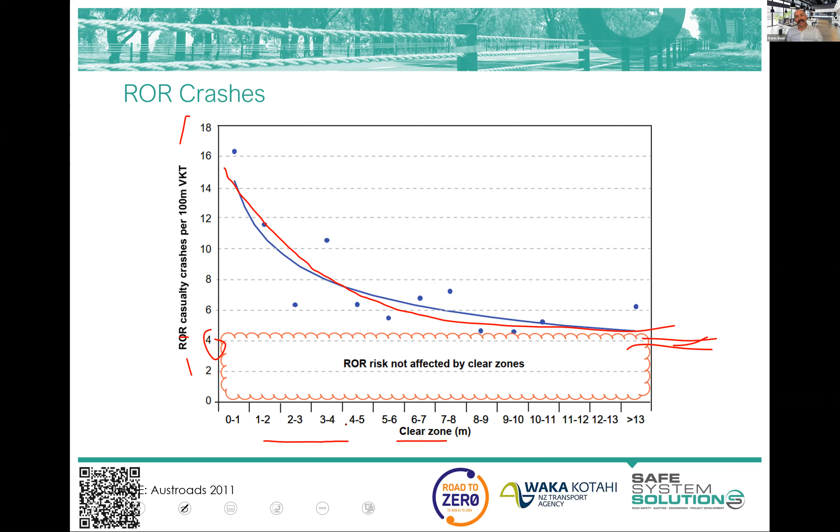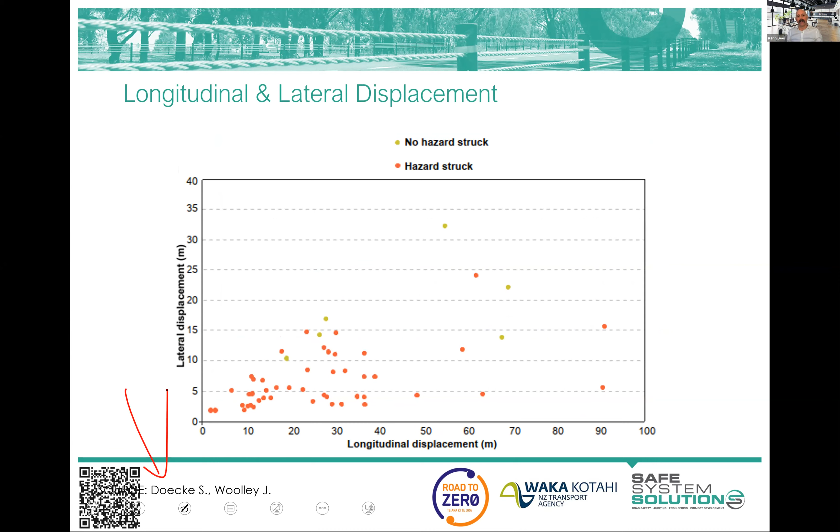I'm not going to go through a whole lot of these - there's some of the data behind it, got some references hidden by that QR code of some of the research behind this. But what I want to say is that a wide clear zone or cleared area, free of hazards, is not necessarily a safe place to be. It's a safer place to be than one with fixed hazards, but we are still going to see vehicles going beyond any sort of cleared area and rollovers potentially occurring.

So wide clear zones are not the highest alignment with safe system principles and are very hard to achieve, because we can't be going around chopping all the trees down on the roadside. That's just not what we do anymore. And it's very expensive.

So what we need to be looking at is what else can be done. I probably wouldn't show this slide 10 or 15 years ago, because road safety barriers came with quite a few risks in their own right. We had challenges with vehicles vaulting over barriers, spearing. The end terminals were kind of okay, but there were lots of issues - they didn't absorb too much energy.

But with what barrier technology is doing now - and it is amazing - it's actually a safer thing to have a flexible barrier system at about 4 to 6 meter offset from the edgeline, than providing a cleared area out to almost 15 meters, which often you just can't do anyway. So barriers are just amazing for passenger vehicle crashes in terms of the way they absorb energy, the sophistication of the end terminals, their absorption of energy, and testing requirements. It's amazing stuff, and I'm not going to talk for days on that. But it's just to say that you will see that idea of continuous barrier systems more and more into the future.

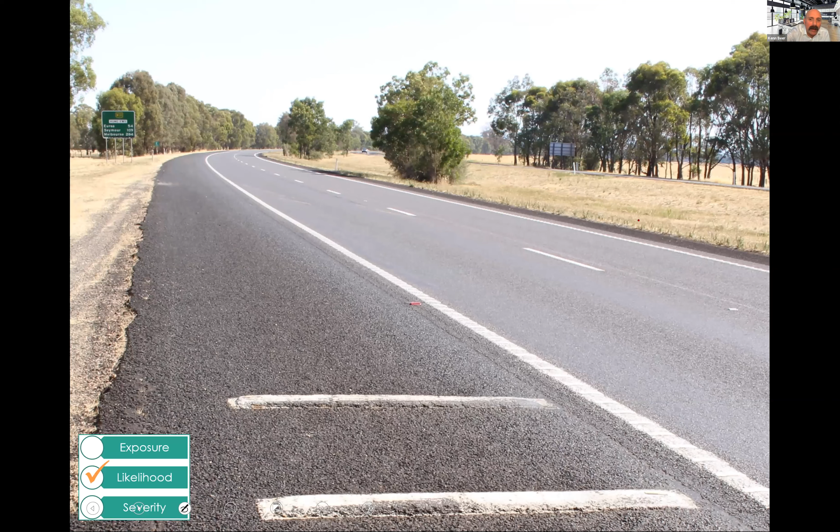So Austroads Guide to Road Design Part 6 used to, a few years back, basically tell us to design a new town bypass looking like this. Big area, get rid of hazards, wide cleared median, cleared area, and you have your trees just outside the clear zone. Probably wouldn't have truck rumble strips. That's not something that's in there, although that's not a bad one to try if you've got concerns about trucks leaving the road.

But we just know that there's going to be death and serious injury, lots of it built into this. And this one was built probably 20 years ago. There's lots of people who have fallen asleep, run off the road, hit trees, made it to the other side of the road, hit other vehicles.

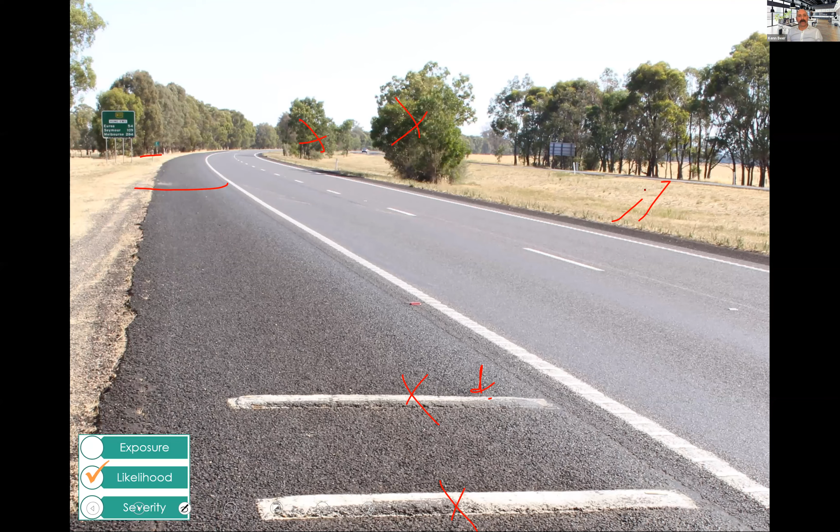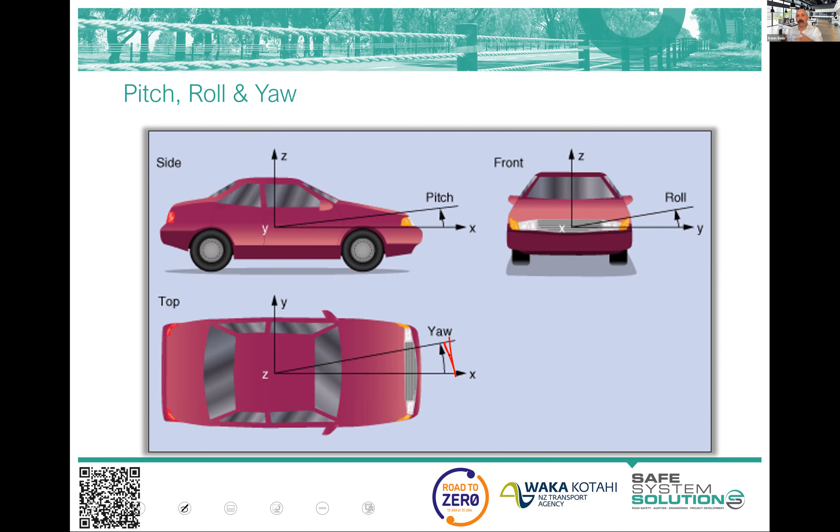So luckily we've sort of advanced a bit from that. I talked to you about yawing being that side-to-side slide and exposing the side of the vehicle as they leave the road. There used to be a common misconception a lot of the time that people just fall asleep and drift off the road and then they hit a tree. That sometimes happens, but it's more common that they're awake at a point and then the yawing starts to happen.

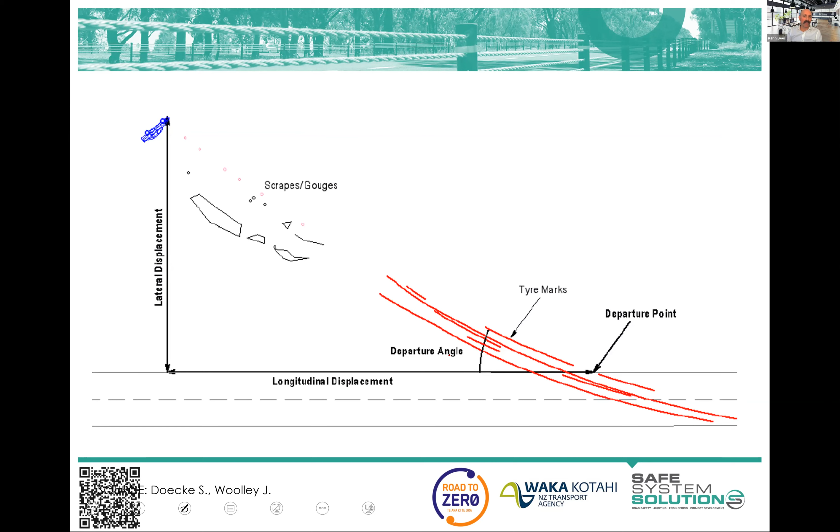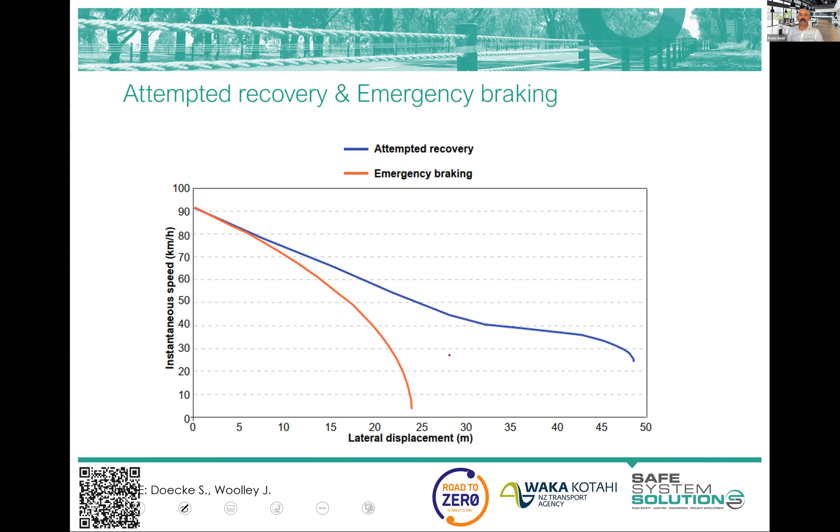Again, lots of detailed information about some of the research about what they've found in terms of distances vehicles are traveling, hitting hazards, and whether they've attempted to brake or attempted to recover, and how that plays out. So I've put some of that into your notes, but I don't expect you to go into that detail. It just might be something you find interesting.

The new Austroads Guide to Road Design Part 6, Roadside Design, Safety and Barriers, has some really exciting ways to think about roadside hazard management. I like it a lot. I like aspects of it a lot. The one thing, though, I do need to flag with you is that the definition of exposure in this document is different to the definition of exposure in the Safe System Assessment Framework. So if you're somebody who's using this document a lot and has your network...

NRRIT, what does that stand for? Network Roadside Risk Intervention Threshold Levels and things that come out of this, and you're working down that track and you've got your exposure sorted in this one. Unfortunately, we've used a different take on exposure in this one compared to the Safe System Assessment Matrix. So you're going to have to recalibrate your thinking a little bit. I apologize.

But really, let's keep it simple. The highest alignment with safe system principles for these mid-block sections at high speed for passenger vehicles is just going to be barriers, continuous flexible barriers. It's the bumper bowling of roads. People fall asleep, they leave the road, they hit a barrier. They drift into the other lane, they hit a barrier.

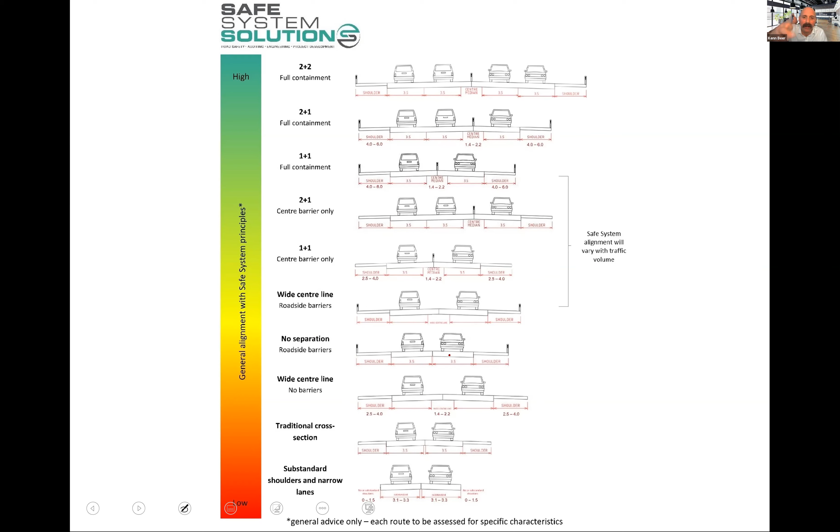And we put this sort of chart in, and it talks a little bit about where things are better and worse alignment with safe system principles. I wouldn't worry too much about that.

We do a lot of IRAP star rating, AusRAP star rating. There's Kiwi RAP star rating as well. And we see here the 4-star road. So this is like your fridge or your washing machine, how it gets a star rating for energy efficiency. There's star ratings you give for roads, 5 stars as well. This big road reserve here where we've got a big wide median and the like, that's 4 stars. But this more narrow constrained one with barriers, that's 5 stars. So that's pretty exciting.

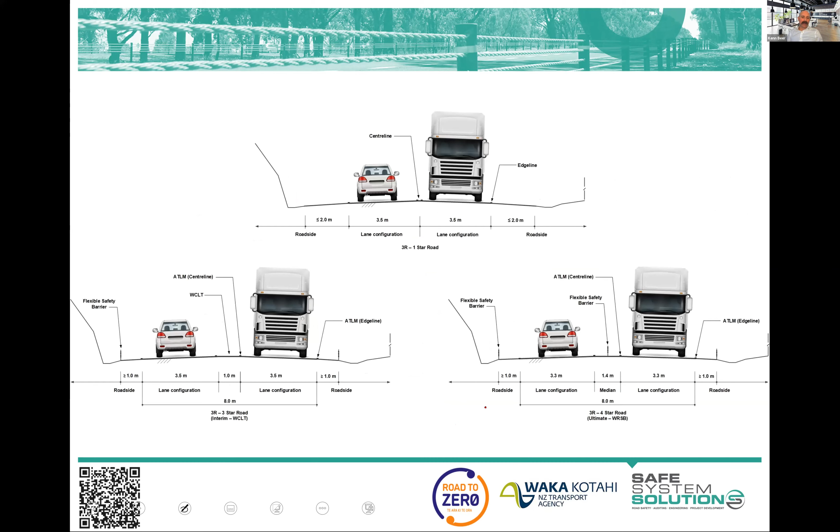You get a safer outcome, less land to acquire. So continuous barrier systems, and then just great examples springing up in New Zealand out of the Safer Roads program and the like, sort of implementing similar cross sections and just achieving wonderful results. Jump through those. But of course, the details of the design and the considerations are critical, and you've really got to be thoughtful, not just of the continuous barrier system, but the access points, the ability to pull over.

And this was a surprise, I think, in some of the different rollouts that we were doing. Really, it's a low volume road.

The risk of this is so low that somebody would be struck, and we know that the big risk is leaving the road and hitting that. And you've got to get your deflection space for the barriers, and so it sort of gets designed somewhat like this. But the community just goes absolutely berserk when we do this, and they don't have the space to pull over. So again, in the design, consider a whole raft of things, and you've got lots of wonderful designers there available to assist.

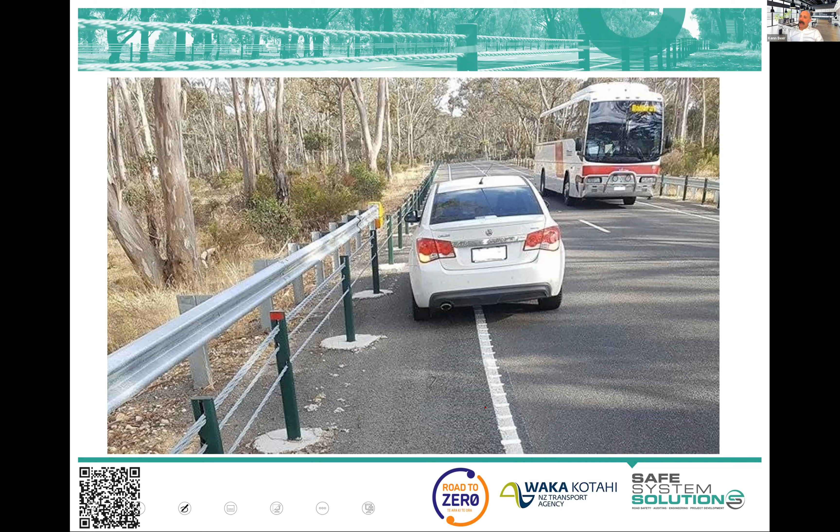And I want to end this one on a specific product, and I have no interest in this product in that sense. But what I love is its energy management, and I love that people are innovating and thinking around how do we manage energy? How do we manage energy with the infrastructure? This is a Raptor cushion, and for those who don't know what a Raptor cushion is, that's what it kind of looks like. It's a device that wraps around a pole, and it's sort of got a honeycomb center, so it crushes a bit.

Its real super benefit is that it rotates on impact, and it redirects the energy. Kind of like martial arts where they say, move the energy of the punch. I've never done martial arts in my life, but I watched the Karate Kid. But so the idea is that the vehicle comes off, the angle of that moves the energy along, keeps the vehicle moving along and slowing down rather than an abrupt stop.

And this was just a forensic crash investigation of an old vehicle, 4 young male occupants, 2 in the morning. You know, it's got all those things that we shake our head at, but they happen so often. And we're going to work on lots of elements of the system to try and stop that happening. But what can we do with our infrastructure? They came through and it was a roundabout. So, you know, I just sung the praises of roundabouts so much. I suppose other vehicles would have slowed down, been looking around, and they were probably not very alert coming through. They lost control. They hit the power pole, which had the Raptor on it.

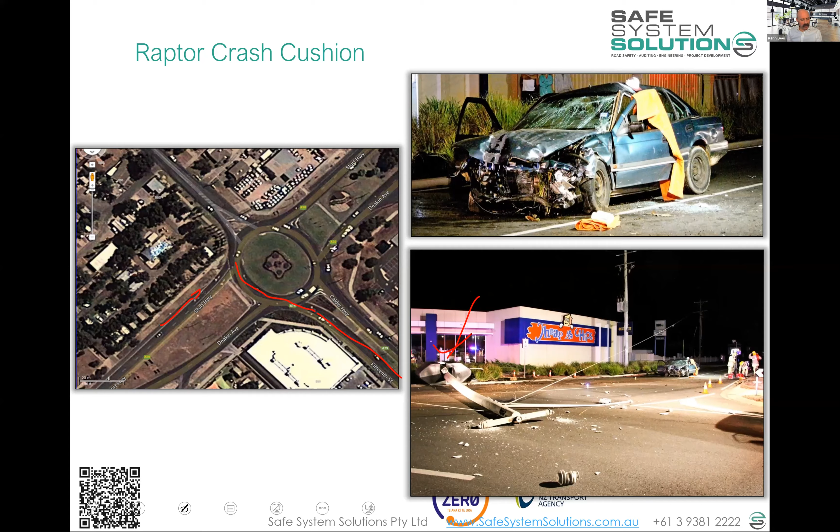Is there another quiz, Max, or not? I might have deleted that at one point. Oh, but good news to you, Ken. There is. We do have a second poll. I'll launch it right away. True or false? Sealed shoulders improve road safety. Same selections as last time. Is it true? Is it false? Or is it unintelligible to be asking that?

I have a particular gripe at the moment with utility providers not wanting to have these around their power poles for all sorts of crazy reasons. One being that we can't access to maintain, or, oh no, there's something that runs down there and it could overheat. And often we see power poles hit and the utility provider comes back, replaces it, and they replace it with something stronger. They go, oh, we're going to go concrete this time because it knocked down the wooden one, and plonk it back in directly the same spot.

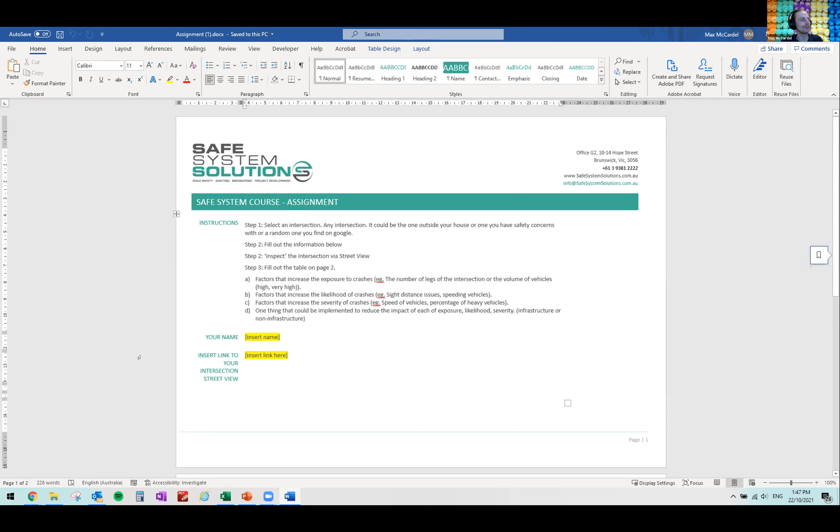So let's have a look at page 2. We're asking for exposure, likelihood, and severity. So we've got factors for each of these, and we're asking you to fill in this table. We're asking for a minimum of 1 factor and a maximum of 3 factors relating to exposure, likelihood, and severity, and you can just dot point those. So we don't expect long paragraphs or anything like that, just quick and easy dot points relating to exposure, likelihood, and severity. And in the second row here, we have changes - any treatments that you could potentially put in place there that would reduce the exposure, likelihood, or severity.

So anything that could be implemented there that would make that road safety outcome a little bit more favourable in terms of exposure, likelihood, severity. That's why ELS has been such a big part of today's conversation and on Wednesday as well, because this exercise will hopefully begin to put all that narrative together and give you a practical example of how to apply that learning.

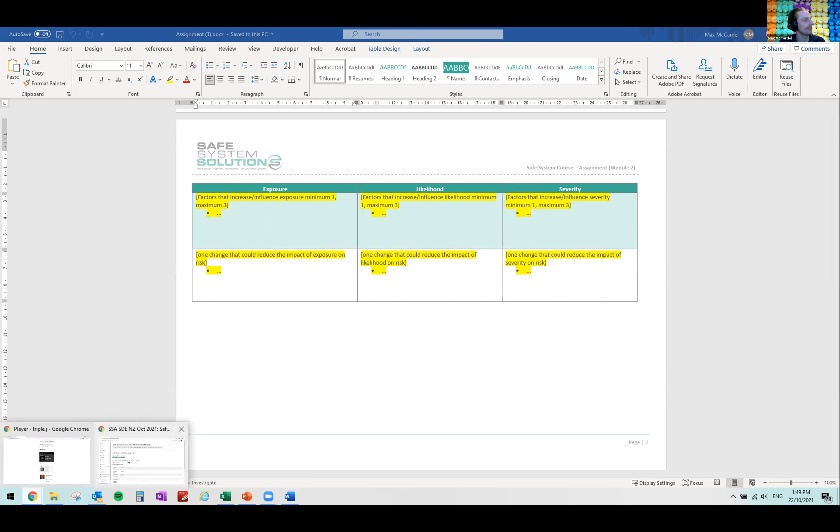Once you've completed all this, save it to your desktop or local drive, and upload it to Moodle. For those who haven't done that before, go back into this window, and at the bottom there's an 'add submission' option where you'll get the prompt to upload a file. We'll be able to review it, provide commentary, and grade you on it.

Oh, sorry Max. I was just going to say, as you stay there, we're going to grade you on it. We will grade you on this one. You're predominantly being graded on your ability to categorize things correctly.

We do ask you to put that link so we can have a look, but we're not going to be super critical on whether that was exactly the right treatment to do. This is really an exercise in your ability to say that influences exposure, that influences likelihood, and that influences severity. Just remember that.

You can do it from your desk using street view. It could be the intersection outside your window, so you could just look out the window for a while and go, yep, that'll do. Very free and easy on that.

And Max, when's it due? Due on Tuesday. The idea is so we can have a quick review of it on Wednesday, and perhaps Ken can chat through any common issues coming up, giving you an opportunity to have that conversation before the next module.

Thanks, Max. At the start of next session we'll dive into somebody's site and have a look. So if you want to volunteer for that for next session, be ready, and we'll do that.